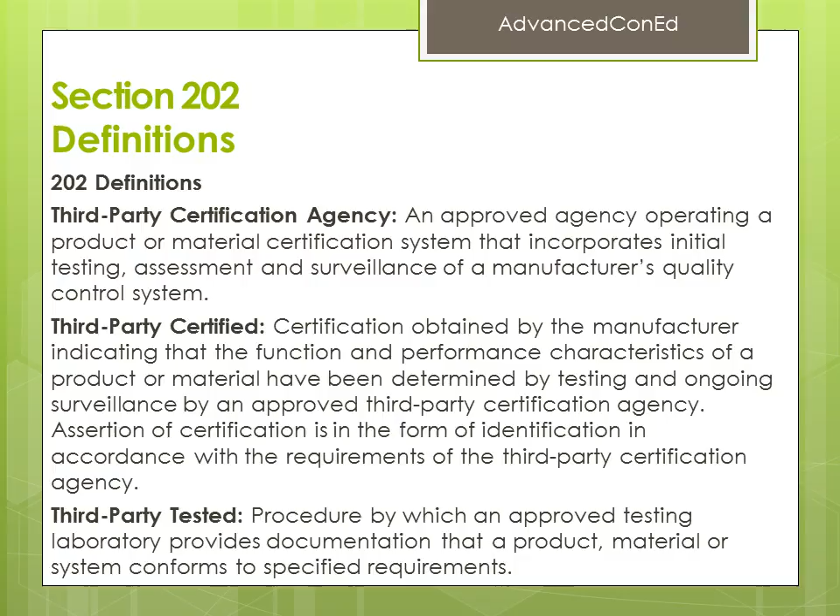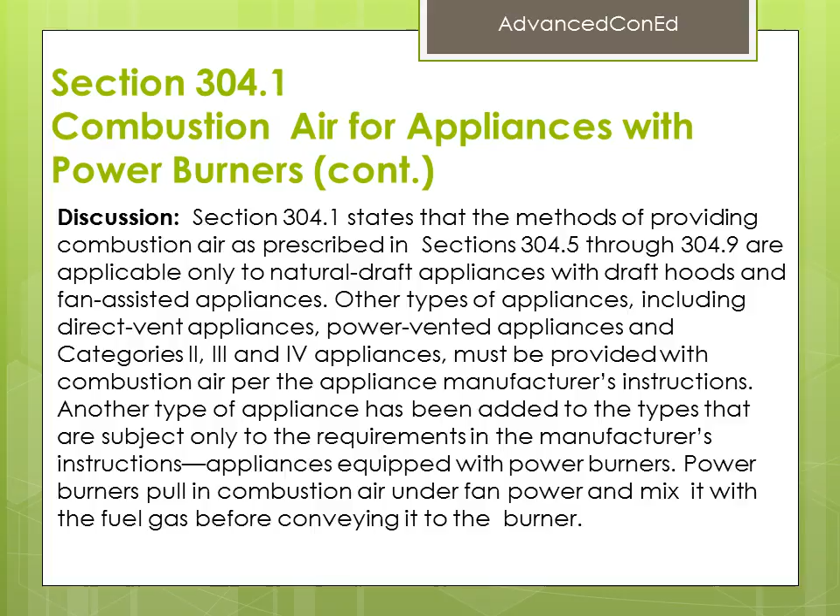Section 304.1, Combustion Air for Appliances with Power Burners, continued. Discussion continued: The methods in Section 304.5 through 304.9 were based on the physics of natural draft, fan-assisted, and Category 1 appliances, and therefore failed to account for the nature of powered systems like power burners. The manufacturer's instructions for large input power burner appliances specify the size of combustion air openings by their own methods. Typically, these methods result in much smaller openings than prescribed in the code. However, some manufacturers simply refer back to the code instead of offering their own method.

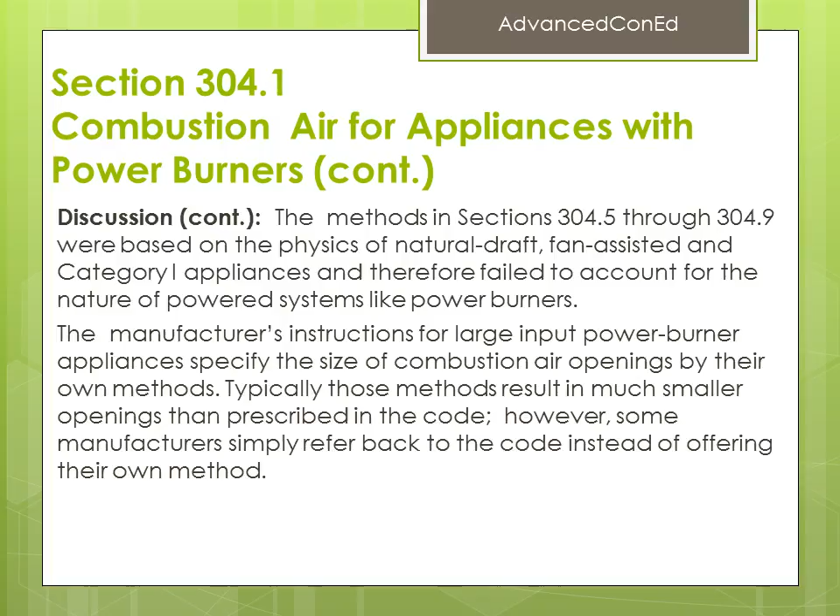Section 304.1, Combustion Air for Appliances with Power Burners, continued. Please review the following diagram at your own rate.

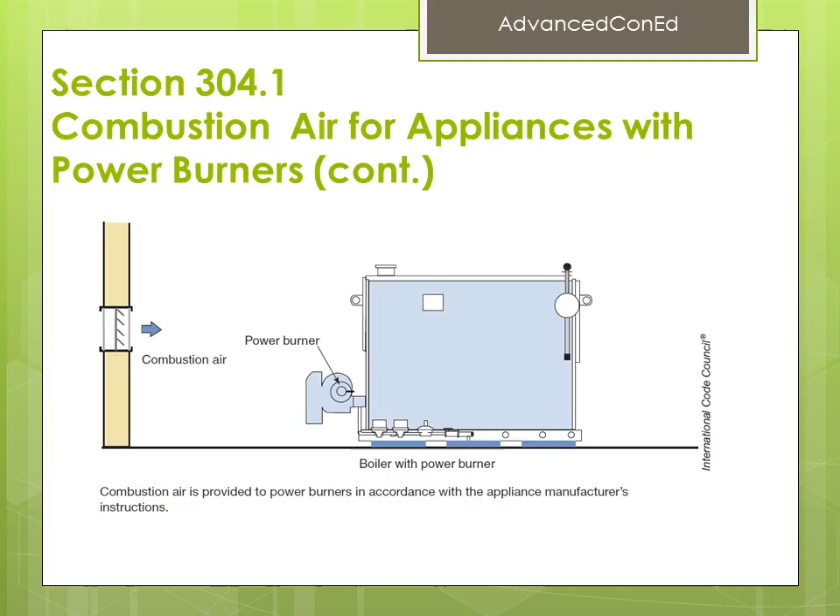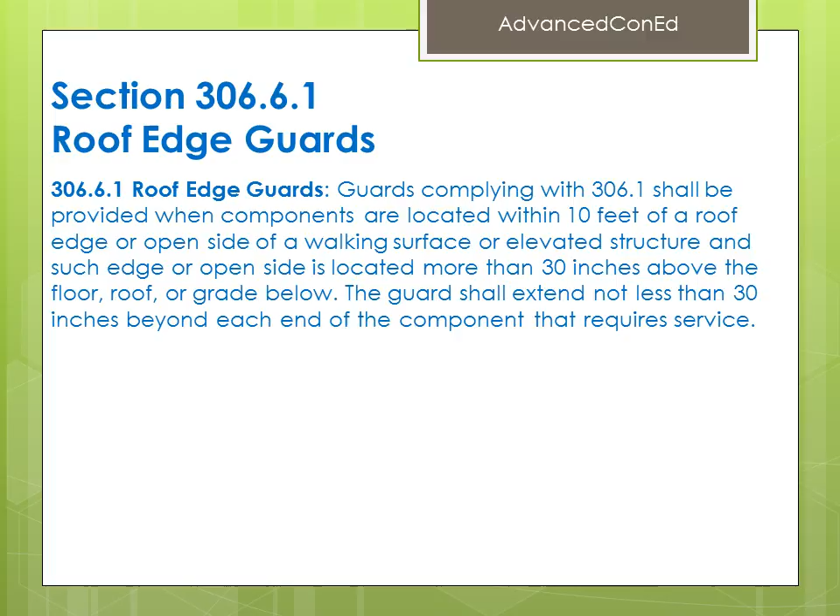Section 306.6.2 Skylight Guards. Guards complying with Section 306.6 shall be provided when a skylight is within 10 feet of the component that requires service. The guard shall extend 30 inches beyond the edge of the skylight. Exceptions: Guards are not required when the skylight is located at least 42 inches above the highest point of the walking surface adjacent to the skylight or component.

Guards are not required if some other provision for skylight fall-through protection is provided and approved by the authority having jurisdiction.

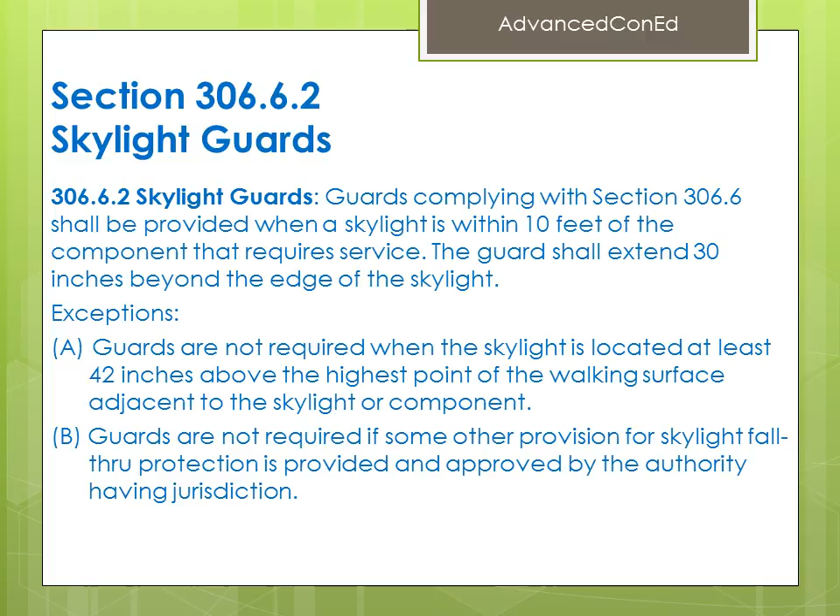Section 306.6.3 Roof Hatch Guards. Guards complying with Section 306.6 shall be provided when a roof hatch is within 10 feet of the component that requires service. The guard shall extend 30 inches beyond the edge of the roof hatch.

If the component is within 10 feet of the ladder access side of the roof hatch, the guard shall incorporate a self-closing, self-latching gate. The gate shall have a top edge of not less than 42 inches above the elevated surface adjacent to the gate and shall not allow the passage of a 21-inch sphere.

If a roof hatch exists within 10 feet of a roof edge that is located more than 30 inches above the floor, roof, or grade below, and a new component that requires service is on that existing roof or elevated structure, then a guard complying with Section 306.6 shall be added between the existing roof hatch and the roof edge.

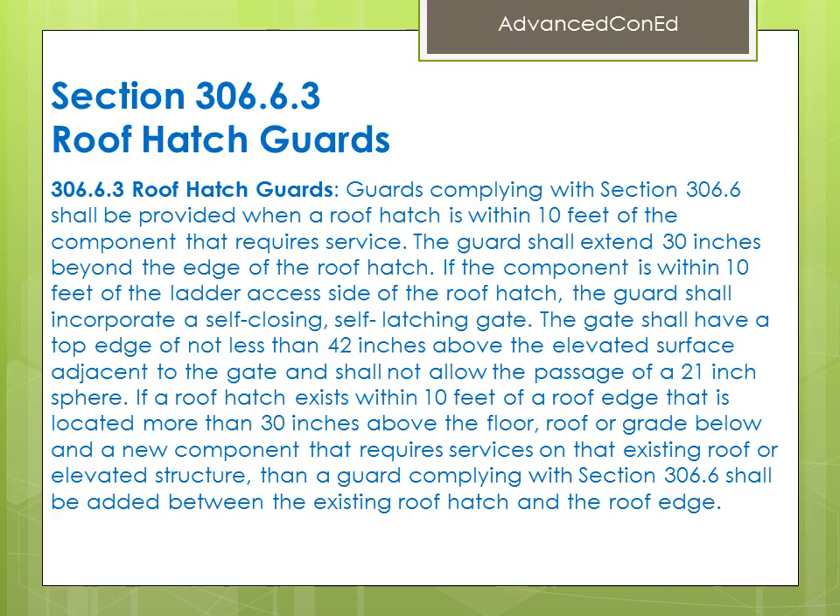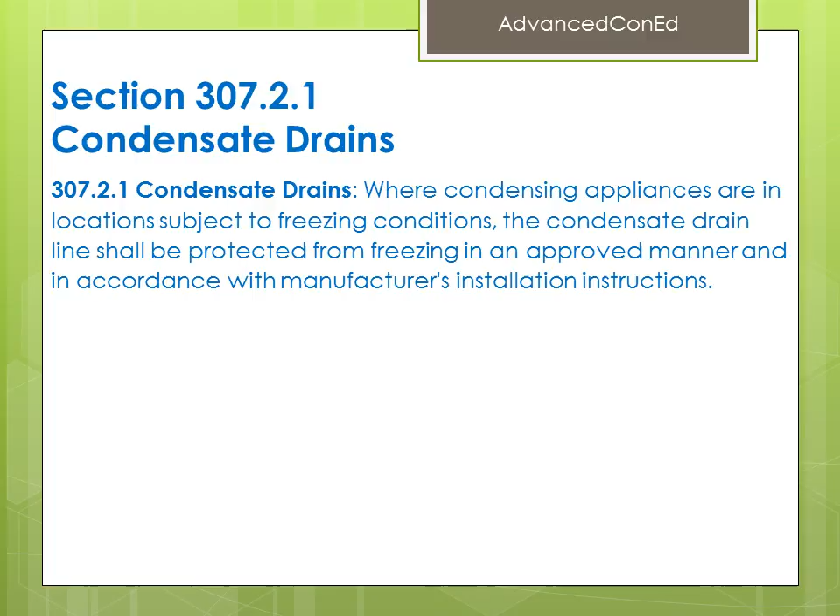Section 307.6 Condensate Pumps, continued. Discussion: Condensate pumps are often located in attics, crawl spaces, and above ceilings where they are not readily observable. If they fail, the condensate overflow can cause structural damage to the building, especially where the overflow will not be noticed immediately. The majority of such pumps are equipped with simple float controls that can be wired in series with the appliance or equipment control circuit.

When the pump system fails, the float will rise in the reservoir and open a switch before the condensate starts to overflow the reservoir. These float controls are commonly not connected, or the pump might not be equipped with an overflow switch. This new code section requires the installation of condensate pumps that have this overflow shutoff capability and requires that the appliance or equipment served be connected to take advantage of that feature.

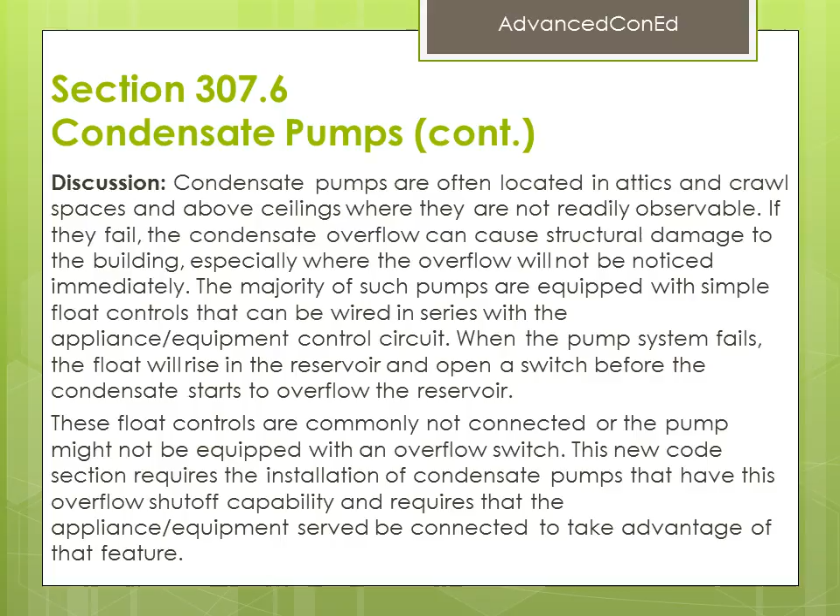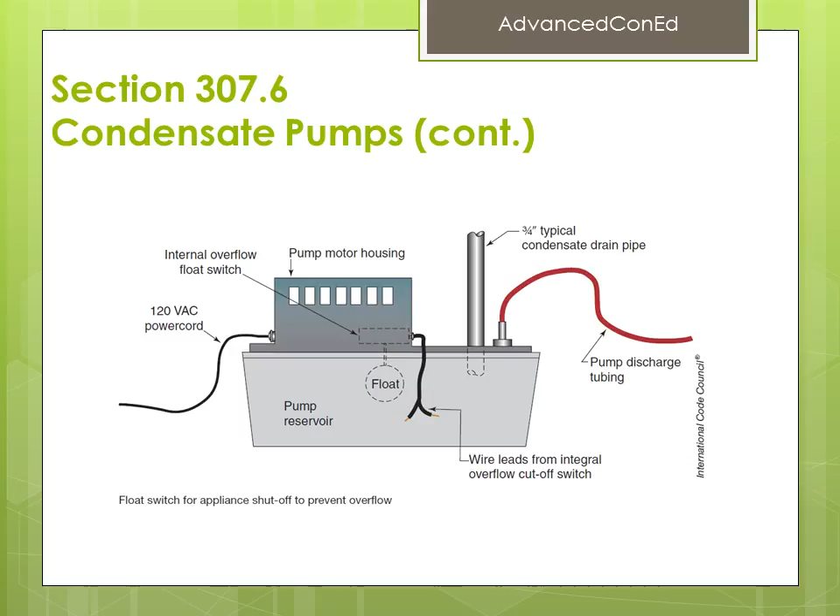Section 308.1 Clearance to Combustible Materials. Scope: This section shall govern the reduction in required clearances to combustible materials, including gypsum board and combustible assemblies, for chimneys, vents, appliances, devices, and equipment. Clearance requirements for air conditioning equipment and central heating boilers and furnaces shall comply with sections 308.3 and 308.4.

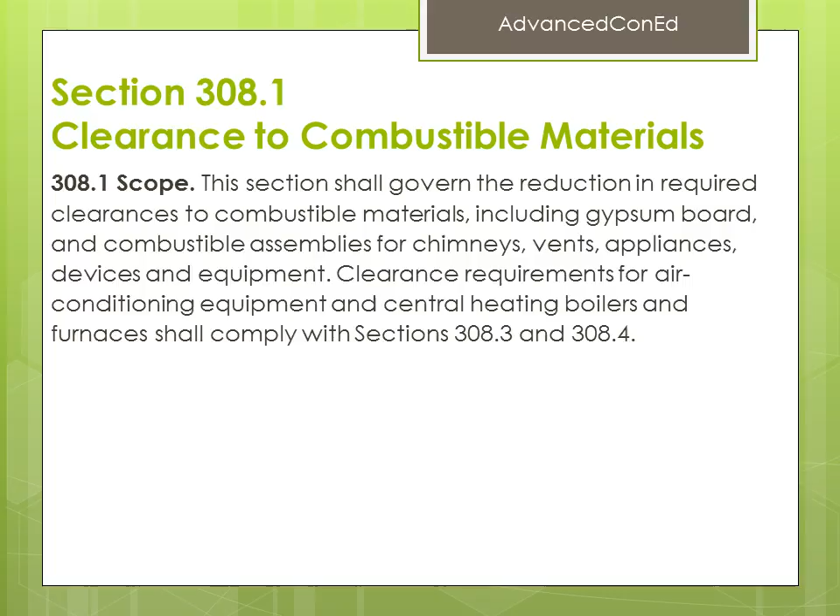Section 308.1 Clearance to Combustible Materials, continued. Discussion: Gypsum board, also known as drywall, is often incorrectly thought to be a non-combustible material. Because of this misunderstanding, the proper clearance to gypsum board required by certain appliances has not been maintained. The code now states that gypsum board is to be addressed in a manner consistent with any other combustible material.

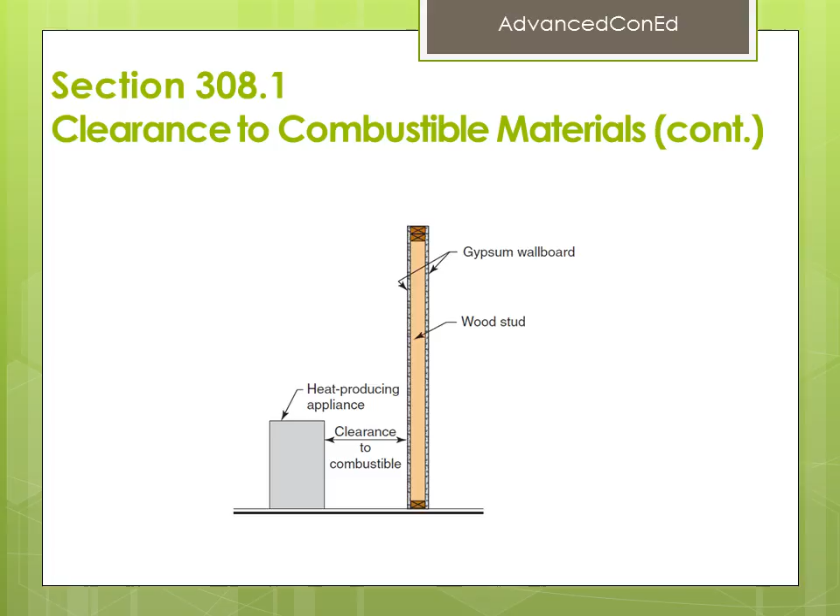Section 310.1.1 Corrugated Stainless Steel Gas Piping Systems. Corrugated stainless steel, or CSST, gas piping systems and piping systems containing one or more segments of CSST shall be bonded to the electrical service grounding electrode system or, where provided, the lightning protection grounding electrode system.

Exception: Corrugated stainless steel gas piping or tubing products or systems that have been designed, manufactured, and listed for installation without bonding to the grounding electrode system shall be permitted to be installed in accordance with the manufacturer's installation instructions.

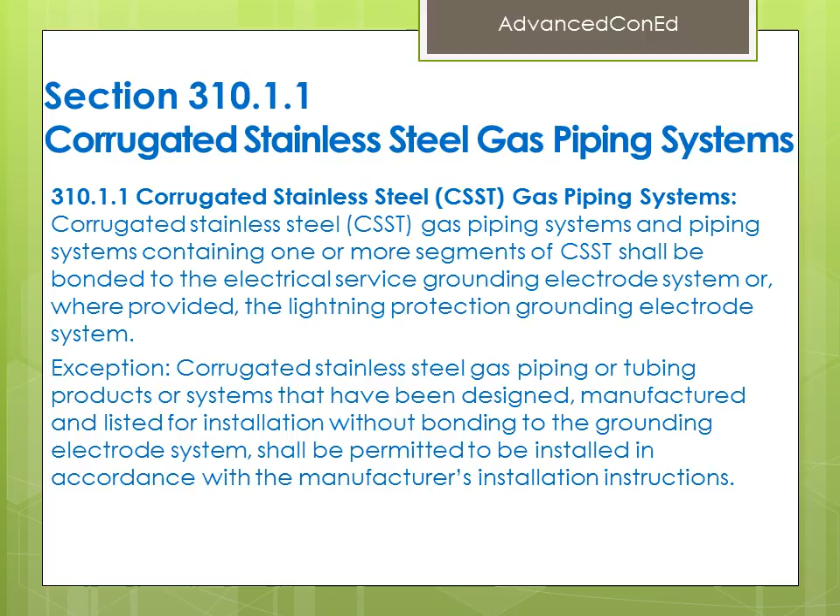Sections 310.1.1.1, 310.1.1.2, and 310.1.1.3. Electrical bonding of corrugated stainless steel tubing.

310.1.1.1 Bonding jumper length. The length of the bonding jumper between the connection to a gas piping system and the connection to a grounding electrode system shall not exceed 75 feet. Any additional grounding electrodes used shall be bonded to the electrical service grounding electrode system.

310.1.1.2 Bonding Connections. Bonding connections shall be in accordance with NFPA 70. 310.1.1.3 Connection Devices. Devices used for making the bonding connection shall be listed for the application in accordance with UL 467.

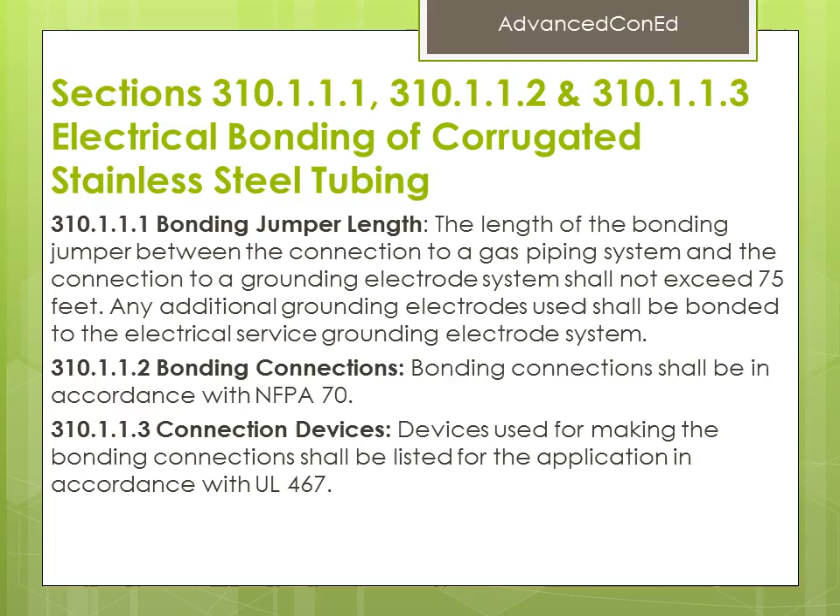Sections 310.1.1.1, 310.1.1.2, and 310.1.1.3. Electrical bonding of corrugated stainless steel tubing. Continued.

Discussion. Extensive testing was performed by the CSST industry to determine how well the bonding protects the CSST from indirect lightning strikes and lightning-induced currents. The testing concluded that the bonding jumper was functionally adequate up to approximately 100 feet in preventing arcing, thus suggesting the need for a length limit.

A length limit of 75 feet was chosen to provide a safety factor. Bonding the CSST to an independent grounding electrode is prohibited. If supplemental electrodes are installed, the code requires that they be bonded back to the electrical service grounding electrode system, consistent with NFPA 70 requirements for a common grounding electrode system.

The points of connection to the electrical service grounding electrode system, the methods of connection, and the protection of the bonding conductors must be in accordance with NFPA 70. The devices, such as clamps, that are used to connect the bonding jumper on both ends must be listed for the application and environment in which they are installed.

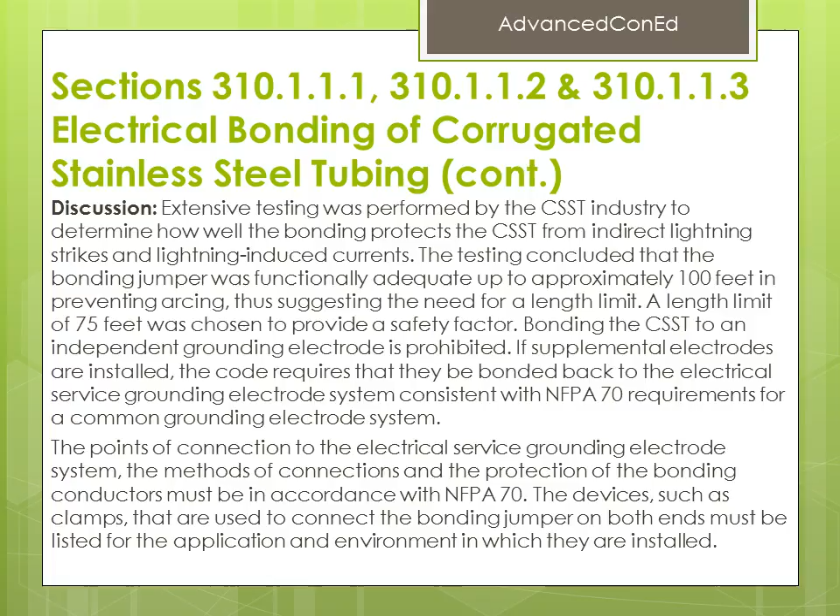Sections 310.1.1.1, 310.1.1.2, and 310.1.1.3. Electrical bonding of corrugated stainless steel tubing.

Sections 401.1, 401.9, and 401.10. Identification, testing, and certification.

401.1 Installation of materials. All materials used shall be installed in strict accordance with the standards under which the materials are accepted and approved. In the absence of such, installation instructions shall be followed. Where the requirements of reference standards or manufacturer's installation instructions do not conform to the minimum provisions of this code, the provisions of this code shall apply.

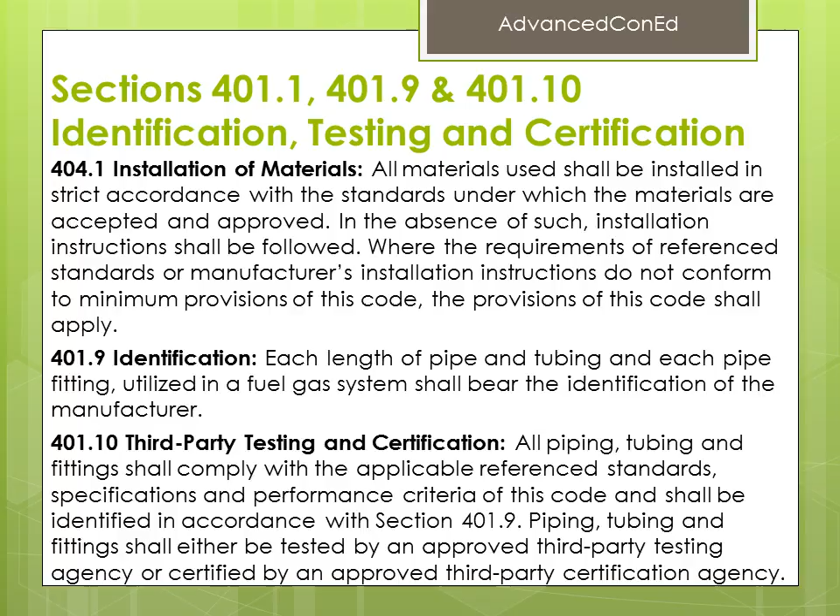Sections 401.1, 401.9, and 401.10. Identification, testing, and certification continued.

Discussion. Each section of pipe, tubing, and each fitting in a gas piping system must bear the identification of the manufacturer. This is the industry method of verifying that the pipe and fittings comply with the standards recognized in the code.

Provisions have also been added to provide guidance on third-party certification.

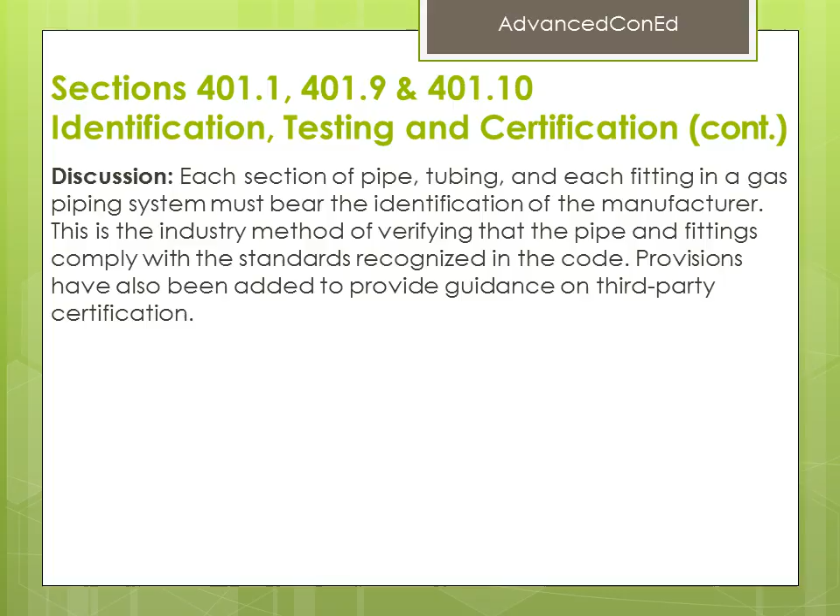Section 402.2, Maximum Gas Demand for Pipe Sizing.

The volumetric flow rate of gas to be provided shall be the sum of the maximum input of the appliances served. The total connected hourly load shall be used as the basis for pipe sizing, assuming that all appliances could be operating at full capacity simultaneously.

Where a diversity of load can be established, pipe sizing shall be permitted to be based on such loads. The volumetric flow rate of gas to be provided shall be adjusted for altitude where the installation is above 2,000 feet in elevation.

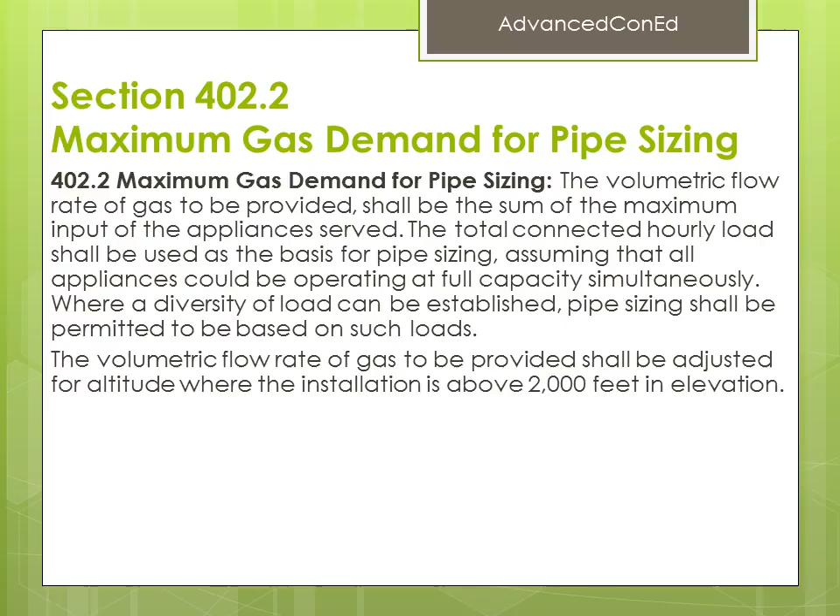Section 402.2, Maximum Gas Demand for Pipe Sizing continued. Discussion. Table 402.2 in previous editions of the code provided estimates as a placeholder in the piping system design, and the design would have to be verified after the true loads were known.

This process introduced the risk that the estimate table could be relied upon solely, and the piping system might be undersized in some cases. It was felt that such design guidance tables belonged in a handbook rather than in a code, and that such guidance tables could easily be misused.

It is safer to never introduce an estimated load in the first place. Designers could use estimated loads if they needed to, but the code should not condone the practice. Also, it is difficult for such a table to accurately represent the many different appliances in the marketplace.

Section 402.2, Maximum Gas Demand for Pipe Sizing continued. Please review the following diagram at your own rate.

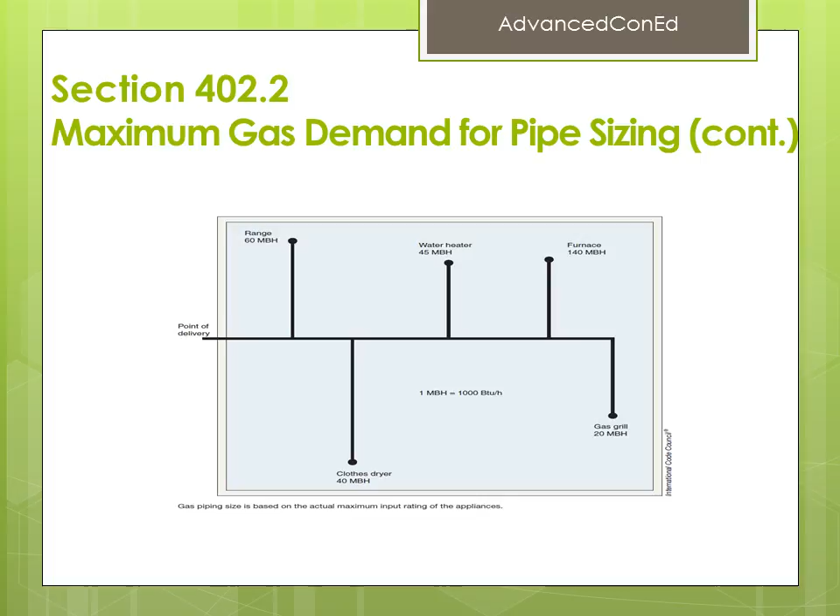Section 403.6, Plastic Pipe, Tubing, and Fittings.

Polyethylene plastic pipe, tubing, and fittings used to supply fuel gas shall conform to ASTM D2513. Such pipe shall be marked gas and ASTM D2513. Plastic pipe, tubing, and fittings other than polyethylene shall be identified and conform to the 2008 edition of ASTM D2513. Such pipe shall be marked gas and ASTM D2513.

Polyvinyl chloride, PVC, and chlorinated polyvinyl chloride, CPVC, plastic pipe, tubing, and fittings shall not be used to supply fuel gas.

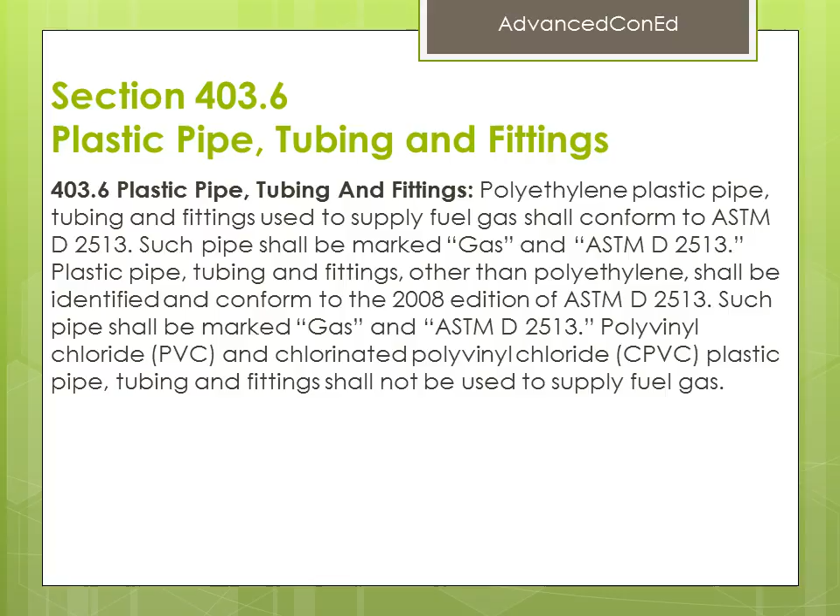Section 403.6, Plastic Pipe, Tubing, and Fittings, continued.

Discussion. The code now references the 2013 edition of ASTM D2513, which has been revised to address polyethylene plastic pipe, tubing, and fittings only, whereas the 2008 edition addressed all plastic materials. The code had to maintain a reference to the 2008 edition of the standard in order to address plastic other than PE, such as polyamide.

It was determined that polyamide pipe is currently used to supply fuel gas. However, CPVC and PVC are not. Further, it was decided that because of the brittle nature of PVC and CPVC, especially at low temperatures, these materials are not suitable for conveying fuel gas. Rather than being silent, the code now prohibits what the marketplace has failed to embrace as a viable material for fuel gas.

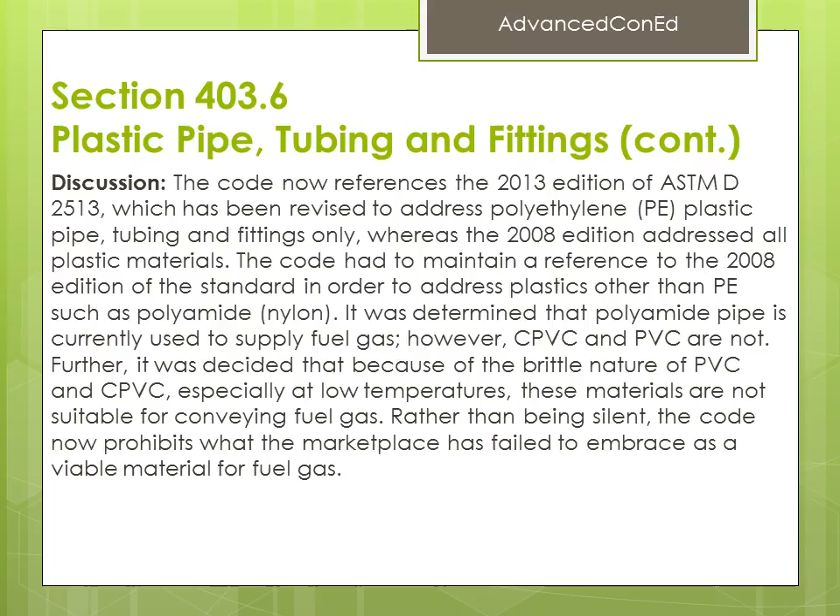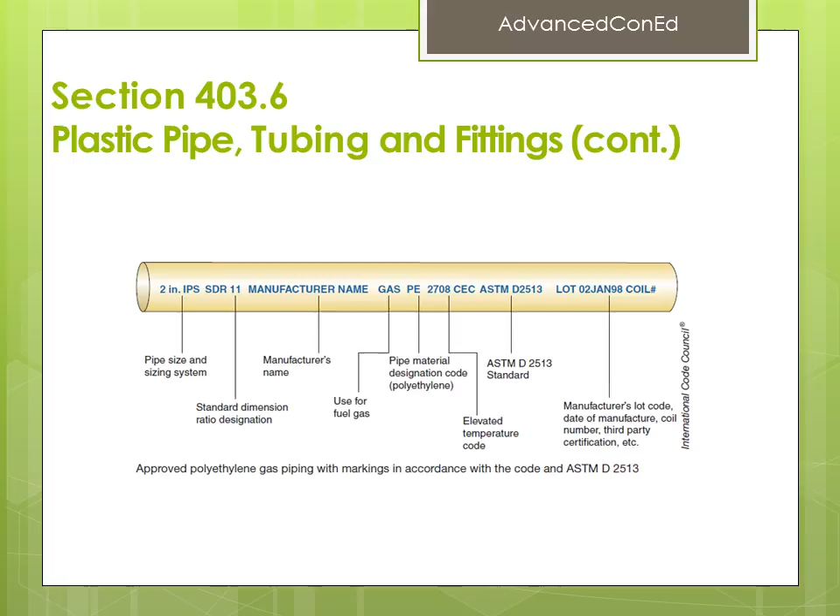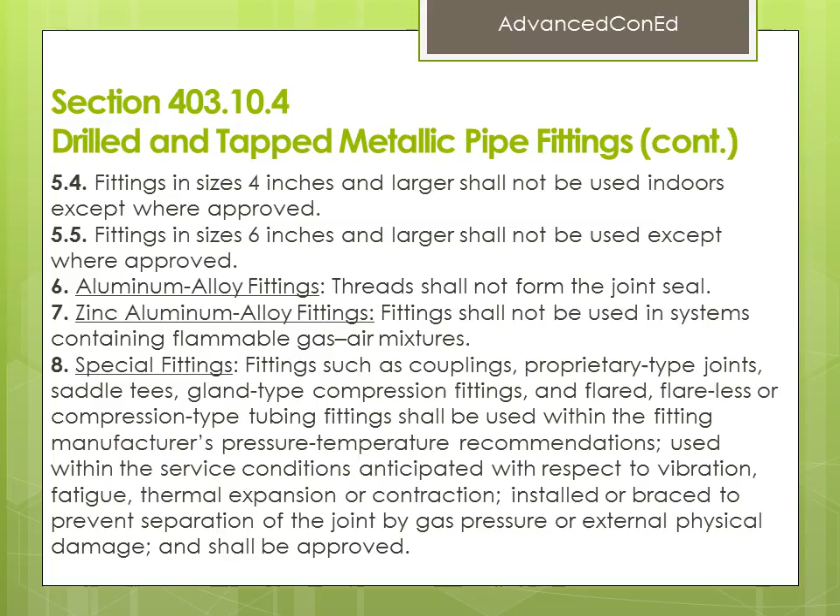Section 403.10.4 Drilled and tapped metallic pipe fittings, continued.

Discussion. Occasionally, an installer will drill a hole in a Schedule 40 or heavier pipe fitting and tap threads in the hole for the purpose of making a test connection or branch connection. The pipe fittings were never designed to be drilled and tapped. The resulting pipe connection or plugged opening would not have sufficient threads to make a tight joint that is both strong and free of leakage, and rely solely on the thread sealant paste or tape to effect a seal.

Field drilling and tapping of outdoor fittings on the outlet side of a meter is performed by some gas utilities. The 5 conditions in the new text limit field drilling and tapping of outdoor fittings to gas utility personnel and authorized contractors. The practice is limited to outdoor fittings, and the entire operation must be performed with specialized tools and equipment in accordance with the prescribed procedures. The drilling and tapping of pipe fittings is prohibited in all cases except where performed in accordance with all 5 conditions that are intended to mitigate the risk.

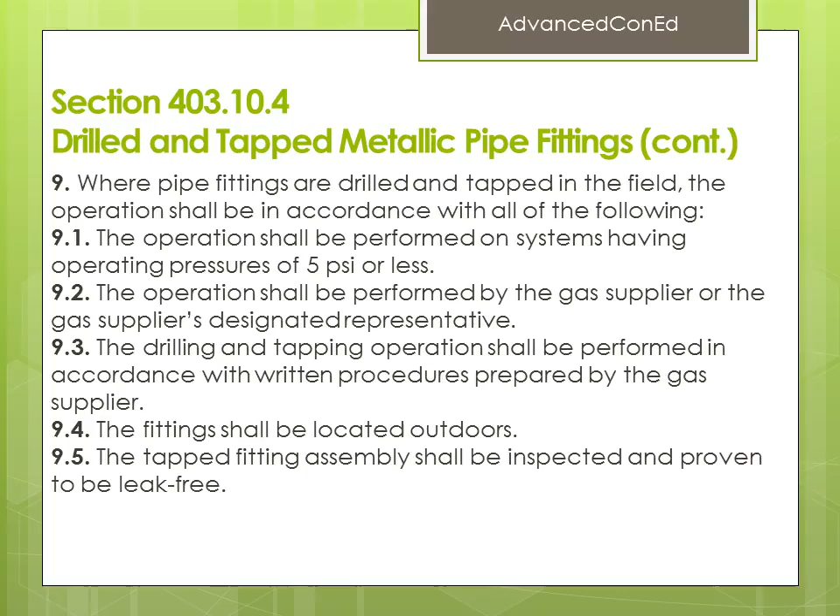Section 403.10.4 Drilled and tapped metallic pipe fittings, continued. Discussion. Occasionally, an installer will drill a hole in a Schedule 40 or heavier pipe fitting and tap threads in the hole for the purpose of making a test connection or branch connection. The pipe fittings were never designed to be drilled and tapped. The resulting pipe connection or plugged opening would not have sufficient threads to make a tight joint that is both strong and free of leakage, and rely solely on the thread sealant paste or tape to effect a seal.

Field drilling and tapping of outdoor fittings on the outlet side of a meter is performed by some gas utilities. The 5 conditions in the new text limit field drilling and tapping of outdoor fittings to gas utility personnel and authorized contractors. The practice is limited to outdoor fittings, and the entire operation must be performed with specialized tools and equipment in accordance with the prescribed procedures. The drilling and tapping of pipe fittings is prohibited in all cases except where performed in accordance with all 5 conditions that are intended to mitigate the risk.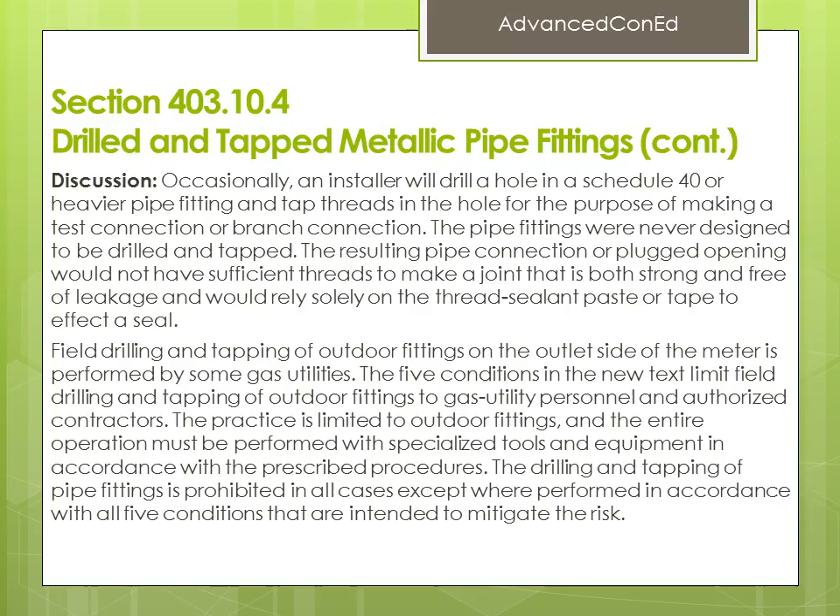Section 404.2 CSST Piping Systems. 404.2 CSST. CSST piping systems shall be installed in accordance with the terms of their approval, the conditions of listing, the manufacturer's installation instructions, and this code.

Discussion. CSST gas piping systems are listed to an ANSI standard and, like other equipment and appliances, are now required to be installed in accordance with the terms of their approval, the conditions of the listing, and the manufacturer's installation instructions.

Section 404.2 CSST Piping Systems, continued. Please review the following diagram at your own rate.

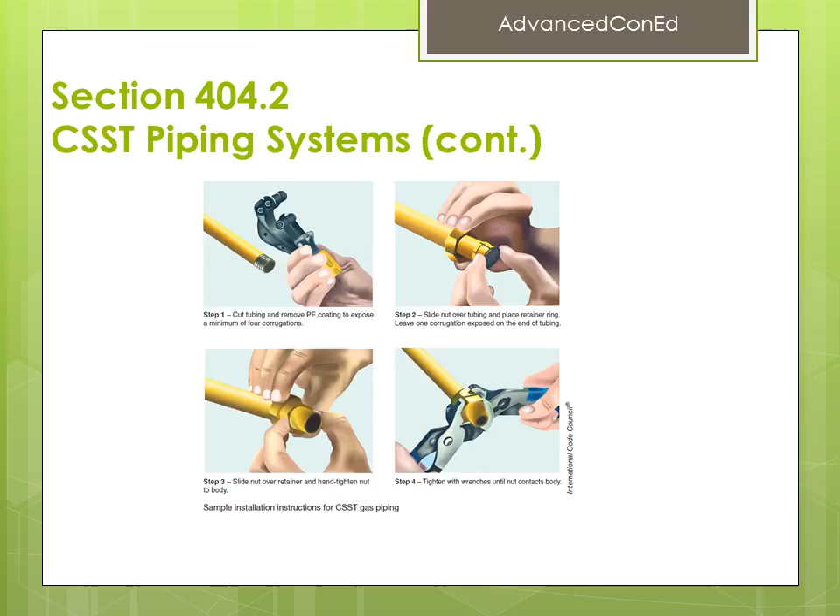Section 404.5, Fittings in Concealed Locations.

Fittings installed in concealed locations shall be limited to the following types: 1. Threaded elbows, tees, and couplings. 2. Brazed fittings. 3. Welded fittings. 4. Fittings listed to American National Standards Institute LC1/CSA 6.26 or American National Standards Institute LC4.

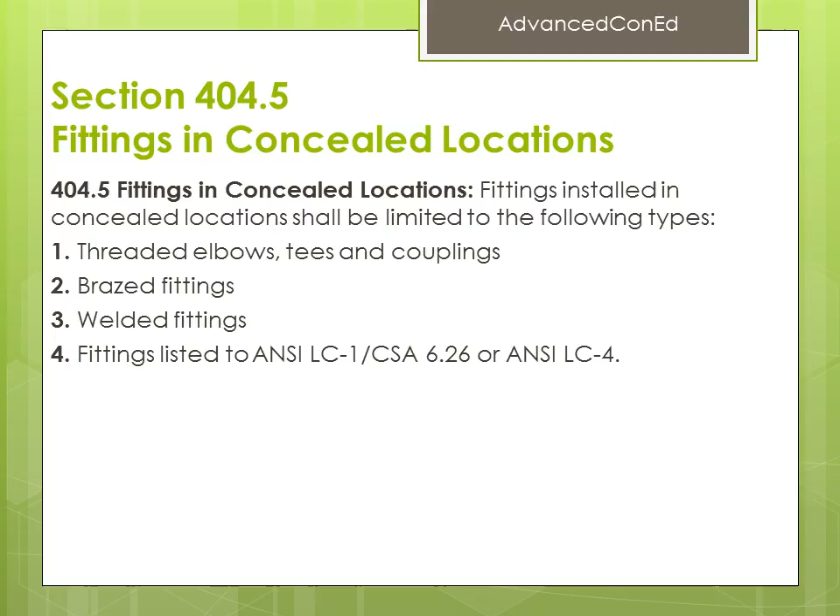Section 404.5 Fittings in Concealed Locations, continued. Discussion. Rather than listing what is prohibited and having exceptions, the text has been reformatted to state what is allowed in concealed locations. The new text lists 4 types of allowed fittings: threaded elbows, tees, and couplings; brazed fittings; welded fittings; and proprietary fittings listed to ANSI LC1 or LC4.

By omission, all other types of fittings are prohibited in concealed locations. In previous editions of the code, this section has caused interpretation difficulties, and the new text simply clarifies what has always been the intent. In future editions of the code, Item 1 will likely be revised to add threaded plugs and caps, as this was revised in ANSI standards.

When the code refers to couplings, these fittings are tapered thread couplings, not straight thread couplings that are commonly found. See Section 403.9.

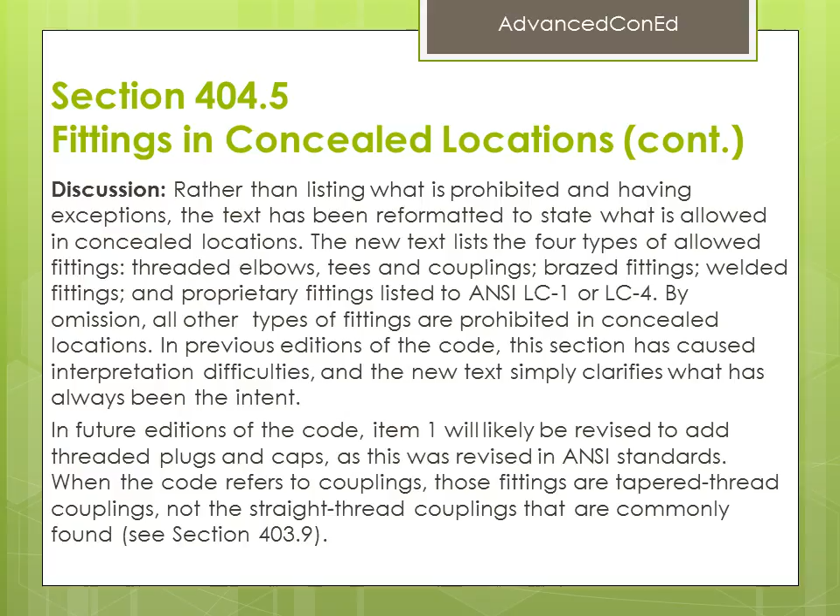Section 404.5 Fittings in Concealed Locations, continued. Please review the following diagram at your own rate.

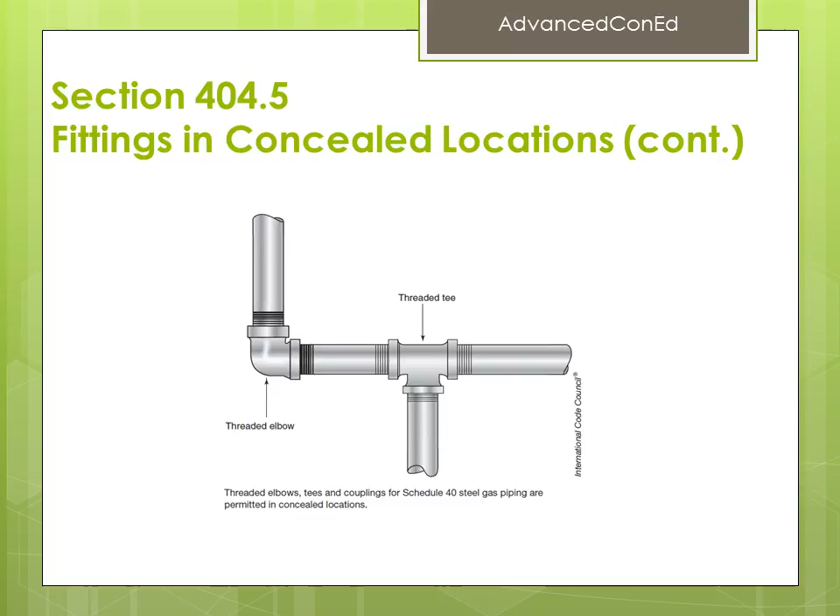Section 404.7 Protection of Concealed Piping Against Physical Damage. 404.7 Protection Against Physical Damage. Where piping will be concealed within light frame construction assemblies, the piping shall be protected against penetration by fasteners in accordance with Section 404.7.1 through 404.7.3. Exception: black steel piping and galvanized steel piping shall not be required to be protected.

Section 404.7 Protection of Concealed Piping Against Physical Damage, continued. 404.7.1 Piping through bored holes or notches. Where piping is installed through holes or notches in framing members, and the piping is located less than 1.5 inches from the framing member face to which wall, ceiling, or floor membranes will be attached, the piping shall be protected by shield plates that cover the width of the pipe and framing member and that extend not less than 4 inches to each side of the framing member.

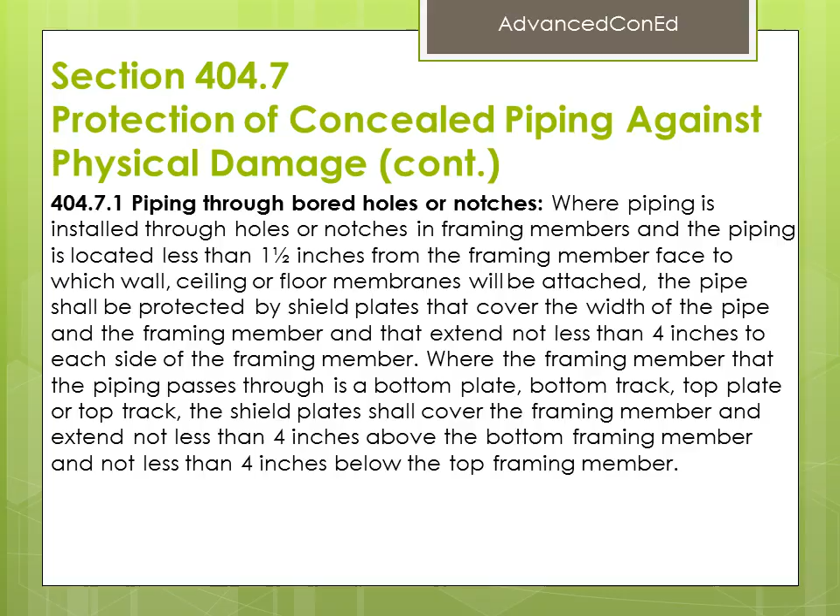Section 404.7 Protection of Concealed Piping Against Physical Damage, continued. 404.7.2 Piping installed in other locations. Where the piping is located within a framing member and is less than 1.5 inches from the framing member's face to which wall, ceiling, or floor membranes will be attached, the piping shall be protected by shield plates that cover the width and length of the piping.

Where the piping is located outside a framing member and is located less than 1.5 inches from the nearest edge of the face of the framing member to which the membranes will be attached, the piping shall be protected by shield plates that cover the width and length of the piping. 404.7.3 Shield plates. Shield plates shall be of steel material having a thickness of not less than 0.0575 inch, number 16 gauge.

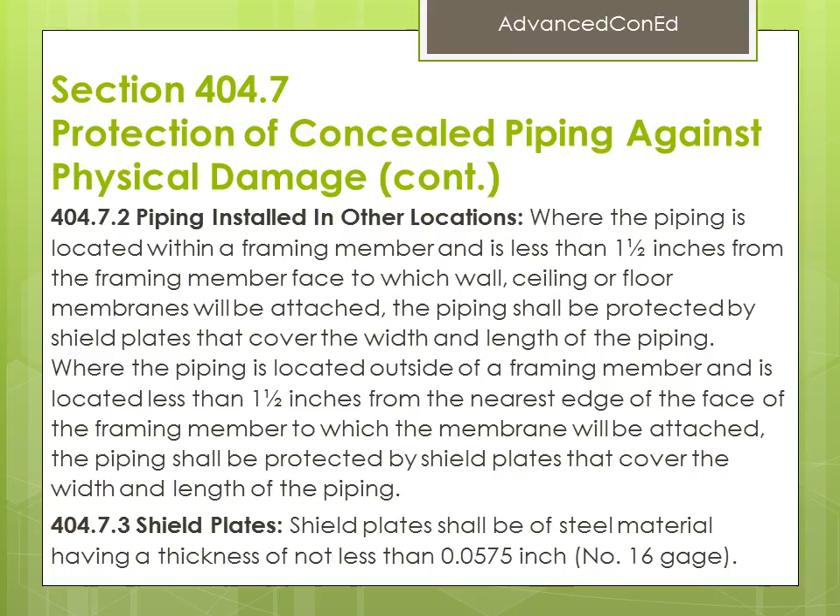Section 404.7 Protection of concealed piping against physical damage, continued. Discussion. Piping and tubing other than Schedule 40 steel pipe must be protected from penetration by nails and screws where the pipe or tubing is less than 1.5 inches from the face of the member where membranes will be attached. This protection is necessary whether the pipe or tube is perpendicular or parallel to the framing member.

Extending the protection shield 4 inches beyond the edges of the framing member is intended to protect against fasteners that miss the member or that exit the member on an angle. To avoid having protection plates run parallel with a member, the installer could simply place the pipe or tube on standoffs such that the pipe or tube is not less than 1.5 inches from the nearest edge of the face of member. Careful installation and routing of gas piping or tubing can avoid the need for installation of protection plates by simply relying on a distance of at least 1.5 inches between the pipe or tube and the fastener face of the member.

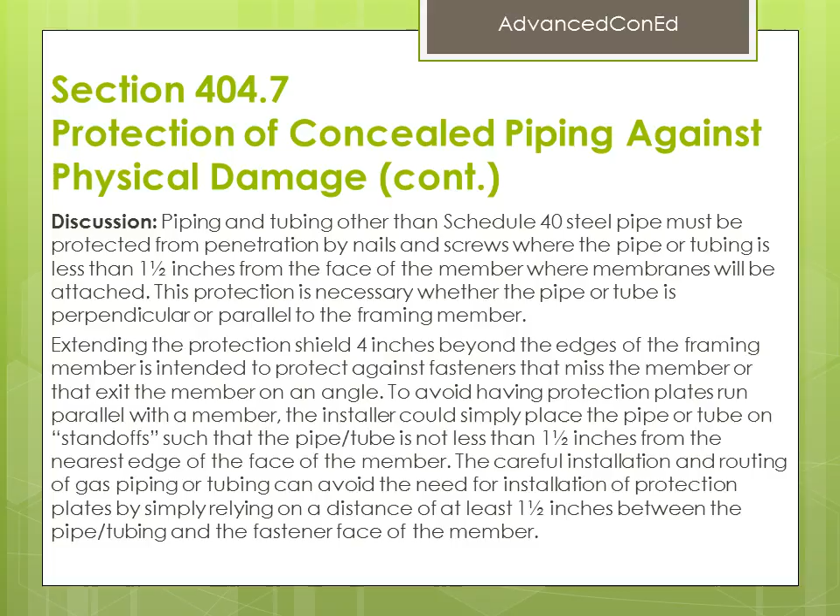Section 404.12 Minimum Burial Depth. Underground piping systems shall be installed at a minimum depth of 18 inches below grade, except as provided for in Section 404.10.1. Exception: where a minimum depth of cover cannot be provided, the pipe shall be installed in conduit or bridged, shielded.

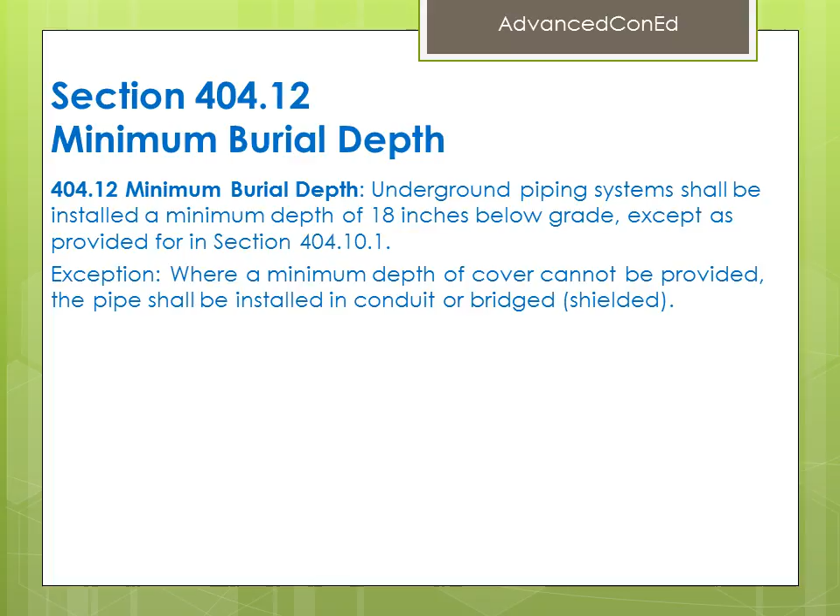Section 404.18 Pipe Cleaning. 404.18 Pipe Cleaning. The use of a flammable or combustible gas to clean or remove debris from a piping system shall be prohibited.

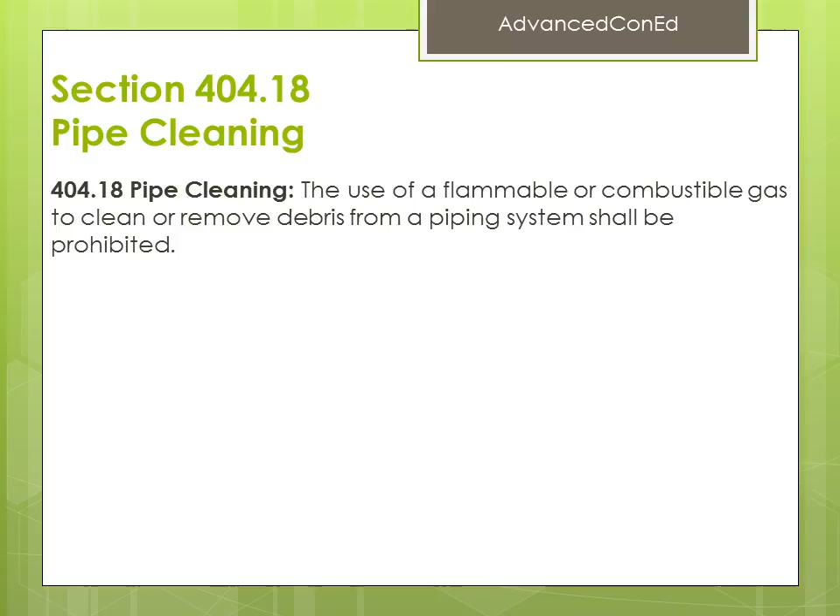Section 404.18 Pipe Cleaning, continued.

Discussion: Recent accidents resulting in explosions, injuries, and property damage have been attributed to a procedure where new gas piping systems have been flushed with high-pressure fuel gas for the purpose of pushing contaminants, debris, welding slag, and tools from the piping. Even under very well supervised conditions, this procedure has significant risks.

Alternatives include using non-flammable gases and/or mechanical devices, or PIGs, that are pulled through the piping, creating a sweeping effect. It was determined that using flammable gases for this purpose is inherently unsafe and therefore should be prohibited. Section 406.7 has been rewritten to mitigate the related hazards associated with the purging of gases from fuel gas piping.

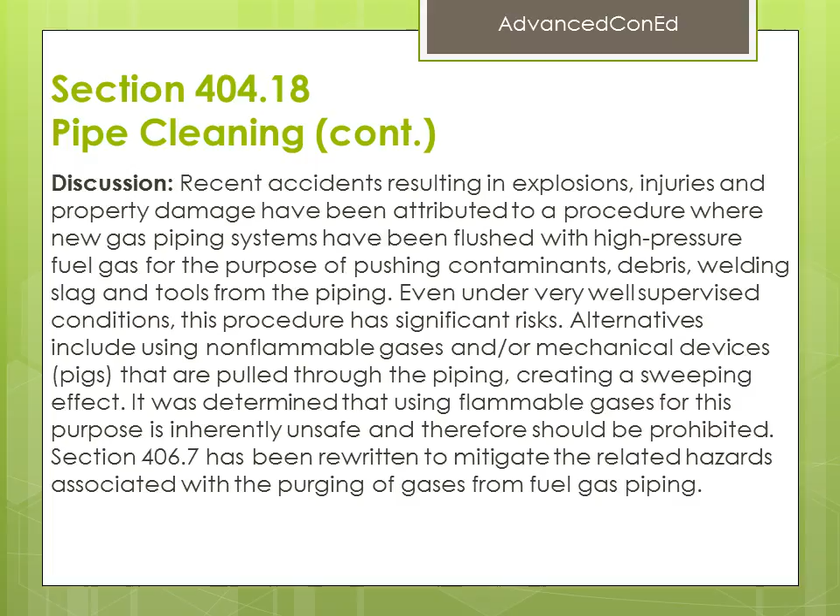Section 404.18 Prohibited Devices. A device shall not be placed inside the piping or fittings that will reduce the cross-sectional area or otherwise obstruct the free flow of gas.

Exceptions: 1. Approved gas filters. 2. An approved fitting or device where the gas piping system has been sized to accommodate the pressure drop of the fitting or device.

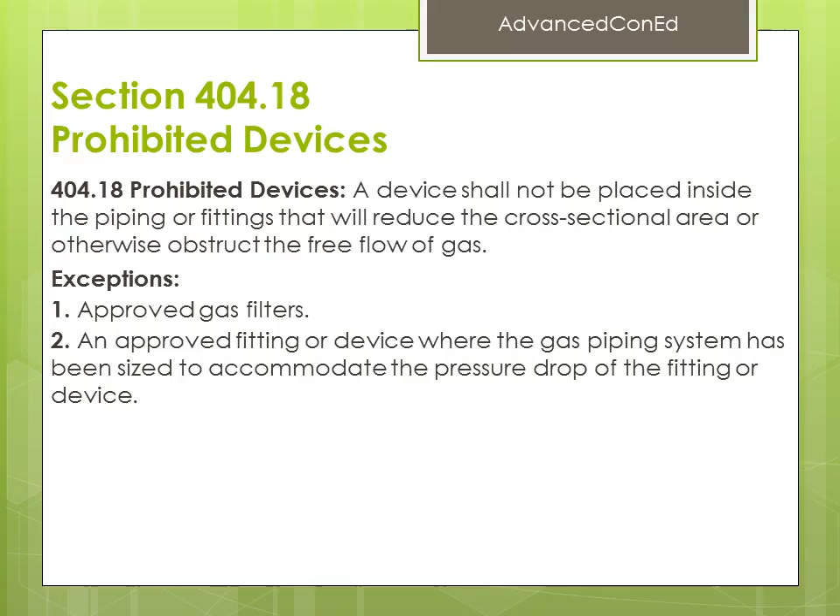Section 404.18 Prohibited Devices continued. Discussion: Devices such as excess flow valves and earthquake valves are considered restrictions in gas piping systems and generally are prohibited from being installed in gas piping and fittings.

It has now been clarified that if the gas piping system has been sized to accommodate a fitting or device placed in the gas piping system, the fitting or device is allowed to be installed.

Section 408.4 Sediment Traps. Where a sediment trap is not incorporated as part of the appliance, a sediment trap shall be installed downstream of the appliance shutoff valve as close to the inlet of the appliance as practical.

The sediment trap shall be either a T-fitting having a capped nipple of any length installed vertically in the bottommost opening of the T as illustrated in figure 408.4, or other device approved as an effective sediment trap.

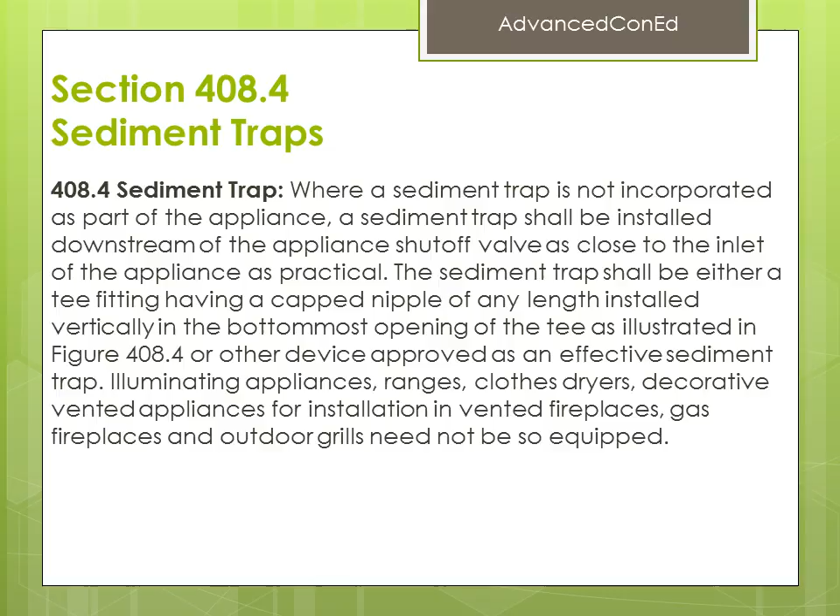Section 408.4 Sediment Traps continued. Discussion: Because of misunderstandings as to how a sediment trap is to be constructed, an illustration has been added to the code text to clarify the intended installation method.

In addition, decorative vented gas appliances and gas fireplaces are no longer required to be installed with a sediment trap. Although these appliances are susceptible to harm from debris, they are also manually operated. Therefore, the user would be in attendance and aware of any problems.

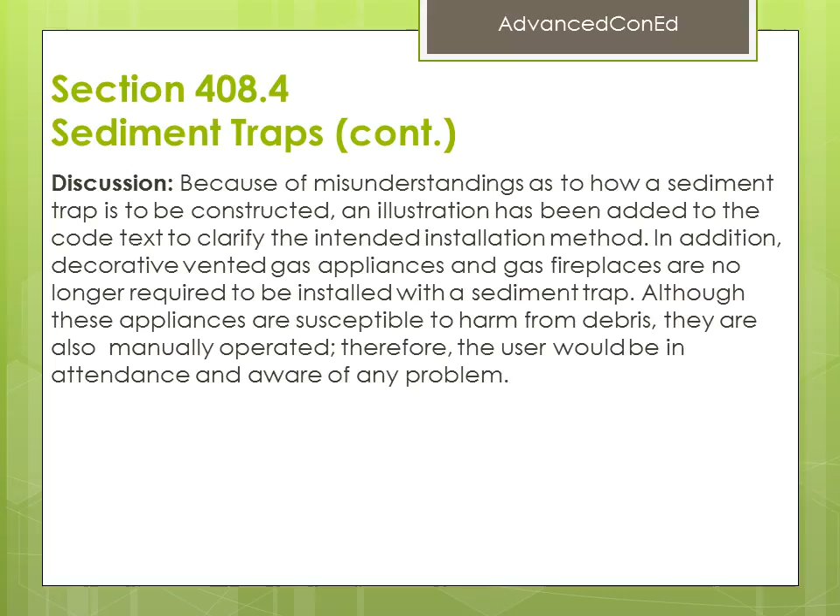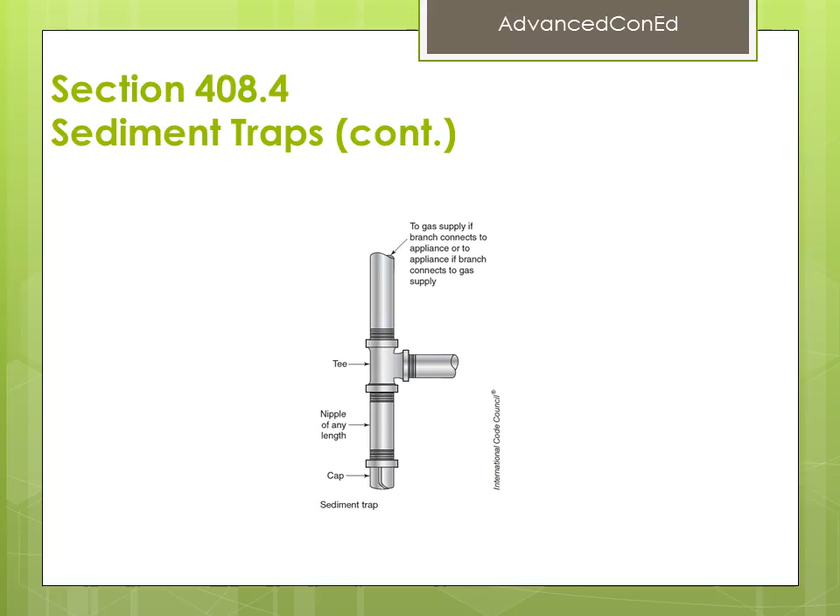Section 410.2 Medium Pressure Regulators. MP pressure regulators shall comply with the following.

1. The MP regulator shall be approved and shall be suitable for the inlet and outlet gas pressures for the application. 2. The MP regulator shall maintain a reduced outlet pressure under lockup or no-flow conditions.

3. The capacity of the MP regulator, determined by published ratings of its manufacturer, shall be adequate to supply the appliances served. 4. The MP pressure regulator shall be provided with access.

Where located indoors, the regulator shall be vented to the outdoors or shall be equipped with a leak limiting device. In either case, complying with section 410.3.

Section 410.2 Medium Pressure Regulators continued. 5. A T-fitting with one opening capped or plugged shall be installed between the MP regulator and its upstream shutoff valve. Such T-fitting shall be positioned to allow connection of a pressure measuring instrument and to serve as a sediment trap.

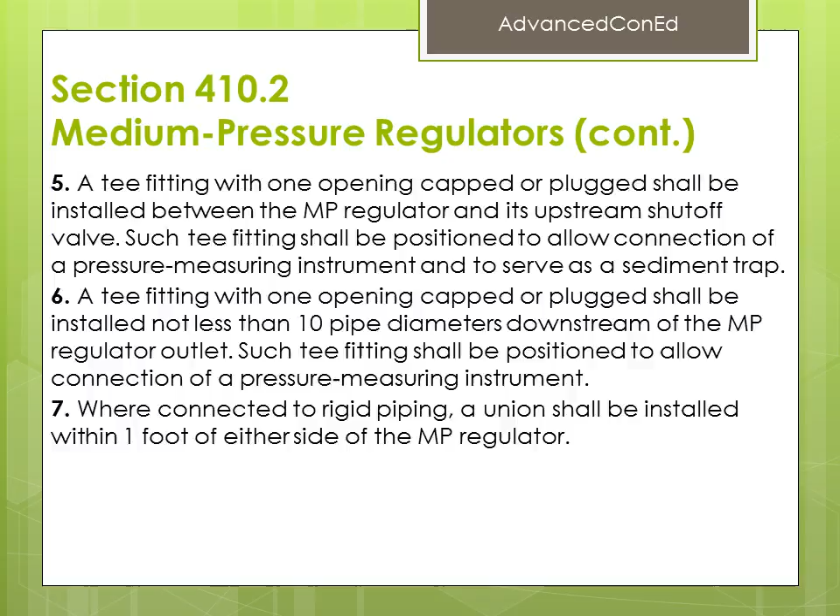Section 410.2 Medium Pressure Regulators continued. Discussion: MP regulators are line pressure regulators that serve to reduce pressures that are above 0.5 psi and less than or equal to 5 psi to some lower pressure.

They are typically installed in 2 psi and 5 psi gas distribution systems that serve appliances having a maximum input pressure of 0.5 psi. If such regulators are installed with steel piping on the inlet and outlet side, the regulators cannot be removed or isolated without disassembly of the piping system for some distance or cutting the piping.

To facilitate the removal or isolation of the regulator, a union fitting must be placed near the inlet or outlet side of the regulator. This is simply a common sense provision.

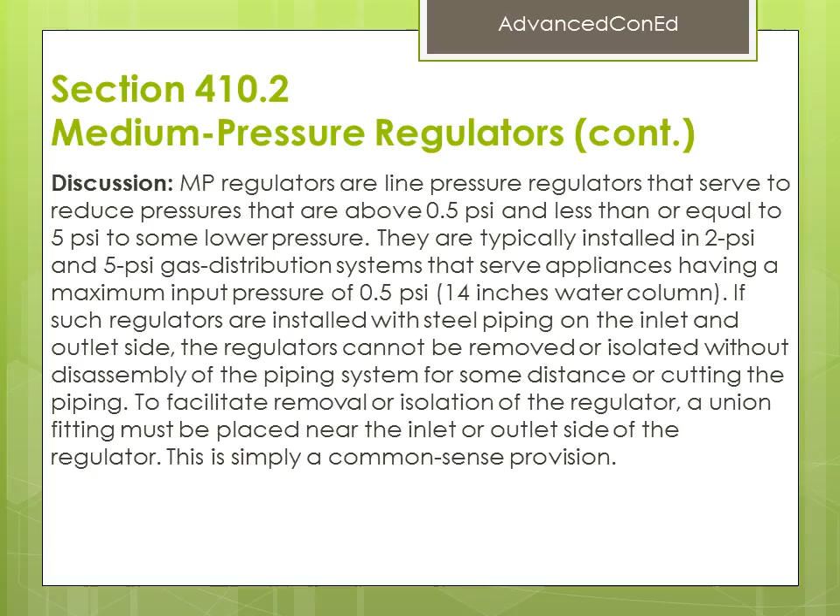Section 410.2 Medium Pressure Regulators continued. Please review the following diagram at your own rate.

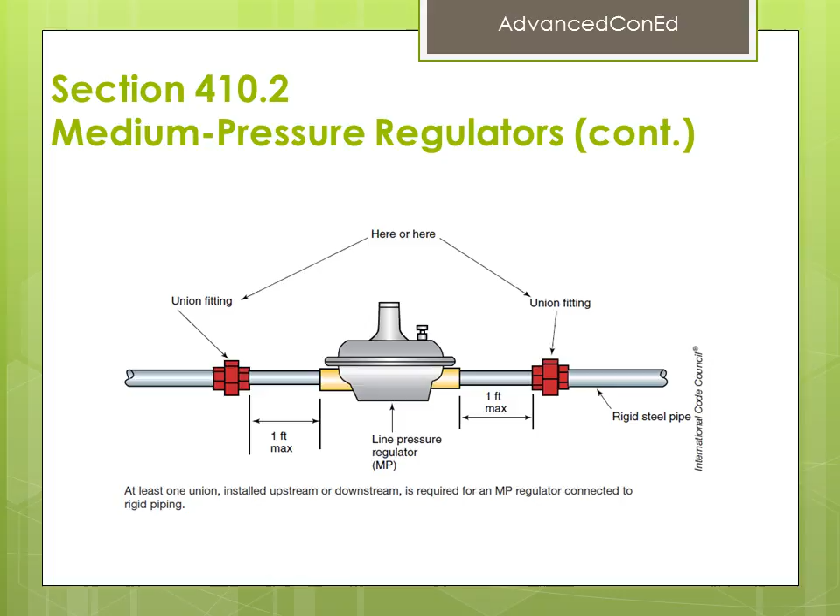Section 410.4 Excess Flow Valves. Where automatic excess flow valves are installed, they shall be listed for the application and shall be sized and installed in accordance with the manufacturer's instructions.

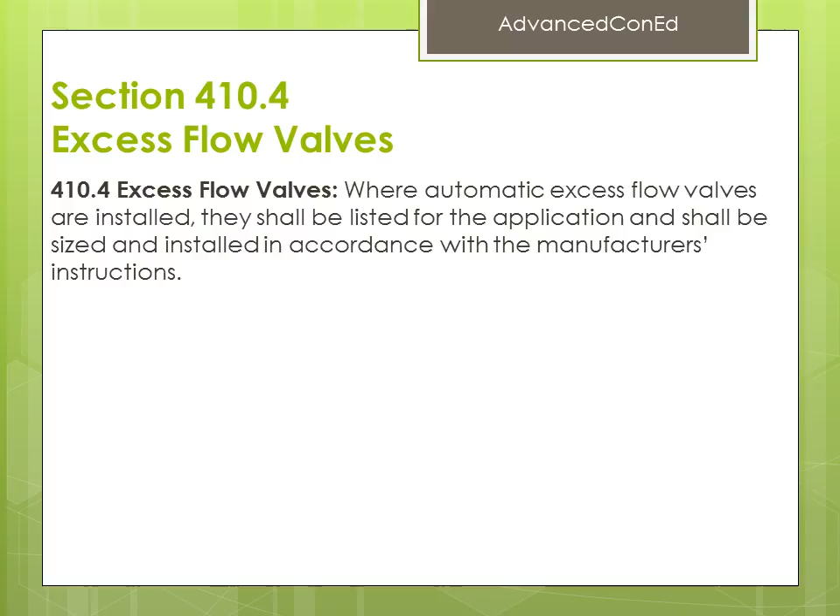Section 410.4 Excess Flow Valves continued. Discussion: Excess flow valves are now required to be listed. In order not to cause pressure drops in the gas piping system, the excess flow valve must also be sized and installed in accordance with the manufacturer's instructions.

Section 410.4 Excess Flow Valves. Please review the following diagram at your own rate.

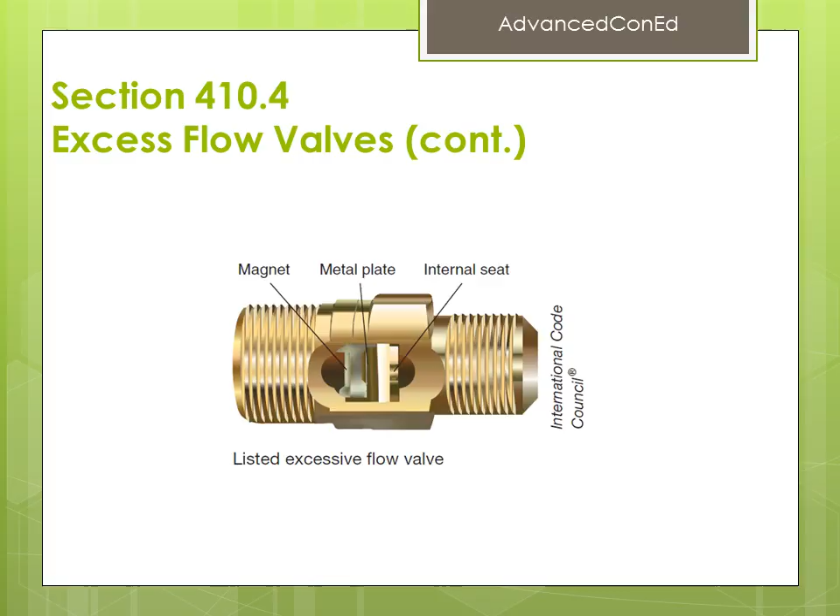Section 202 and 410.5, Flashback Arrestor Check Valve. Definitions: Flashback Arrestor Check Valve, a device that will prevent the backflow of one gas into the supply system of another gas and prevent passage of flame into the gas supply system.

410.5 Flashback Arrestor Check Valve. Where fuel gas is used with oxygen in any hot work operation, a listed protective device that serves as a combination flashback arrestor and backflow check valve shall be installed at an approved location on both the fuel gas and oxygen supply lines.

Where the pressure of the piped fuel gas supply is insufficient to ensure such safe operation, approved equipment shall be installed between the gas meter and the appliance that increases pressure to the level required for such safe operation.

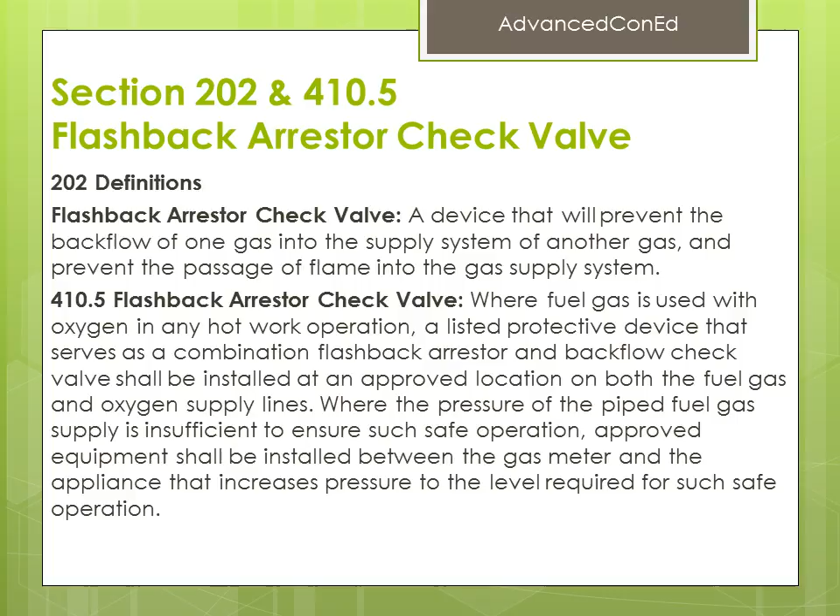Section 202 and 410.5 Flashback Arrestor Check Valve continued. Discussion: To prevent flashbacks from occurring and prevent oxygen from getting into the fuel gas supply system, fuel gas systems that are used with oxygen are now required to have a flashback arrestor and backflow check valve on the gas supply line and the oxygen supply line.

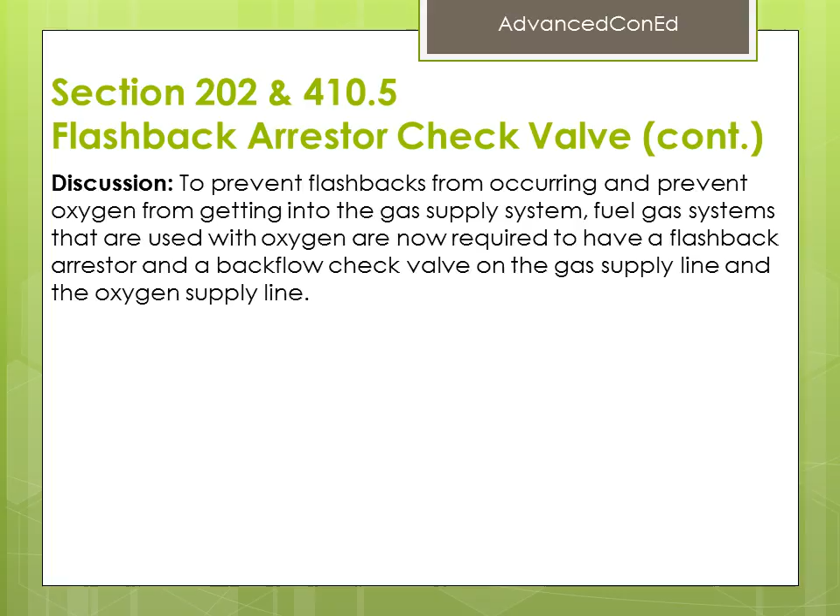Section 202 and 410.5 Flashback Arrestor Check Valve continued. Please review the following diagrams at your own rate.

Section 411.1 Connecting Portable Outdoor Appliances. Except as required by Section 411.1.1, appliances shall be connected to the piping system by one of the following: 1. Rigid metallic pipe and fittings.

2. Corrugated stainless steel tubing, where installed in accordance with the manufacturer's instructions. 3. Semi-rigid metallic tubing and metallic fittings. Length shall not exceed 6 feet and shall be located entirely in the same room as the appliance. Semi-rigid metallic tubing shall not enter a motor-operated appliance through an unprotected knockout opening.

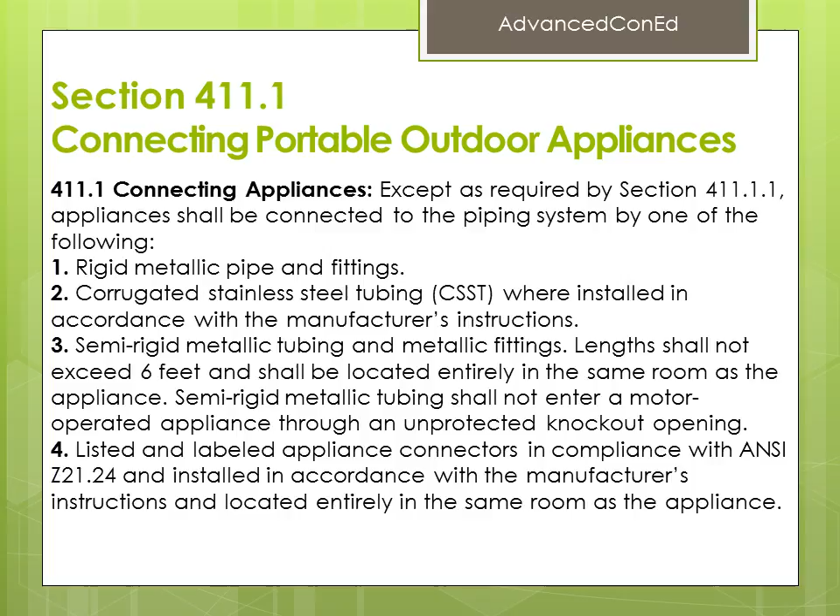Section 411.1 Connecting Portable Outdoor Appliances continued. 5. Listed and labeled quick disconnect devices used in conjunction with listed and labeled appliance connectors. 6. Listed and labeled convenience outlets used in conjunction with listed and labeled appliance connectors.

7. Listed and labeled outdoor appliance connectors in compliance with ANSI Z21.75, CSA 6.27, and installed in accordance with the manufacturer's instructions.

8. Listed outdoor gas hose connectors in compliance with ANSI Z21.54 used to connect portable outdoor appliances. The gas hose connection shall be made only in the outdoor area where the appliance is to be used and shall be to the gas piping supply at an appliance shutoff valve, a listed quick disconnect device, or listed gas convenience outlet.

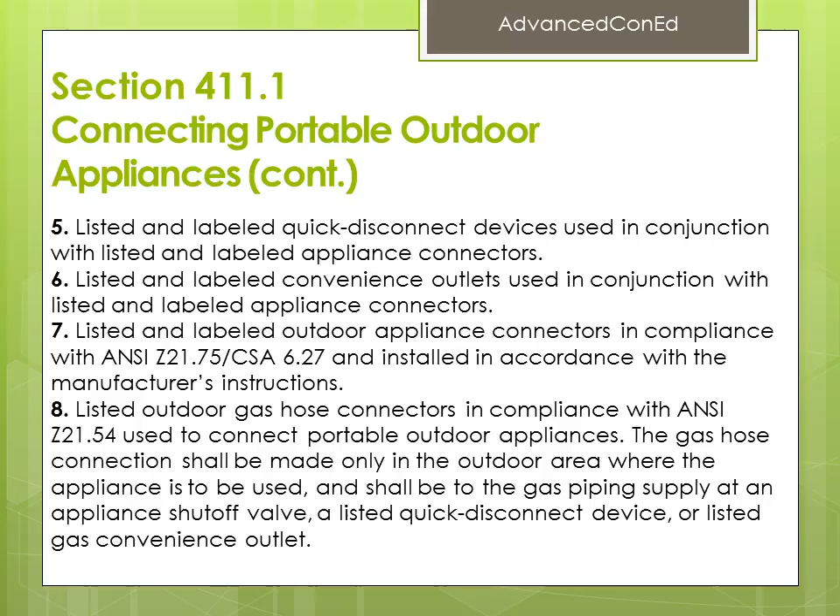Section 411.1 Connecting Portable Outdoor Appliances continued. Discussion: Because portable appliances can be moved, methods 1 through 7 of this section are not suited for connecting portable appliances to the gas distribution piping system.

For outdoor portable appliances, new method 8 is the only apparent option. Outdoor gas hose connectors have to be resistant to mechanical damage, possible heat exposure, and the harmful effects of exposure to weather. Connectors listed to ANSI Z21.54 are evaluated and tested for the particularly harsh environment of outdoor use.

The gas hose connector must be located entirely outdoors and must be connected to the gas piping system at a point outdoors. The point of connection to the gas distribution system piping must be through a listed device that allows the hose to be readily manually disconnected or through an appliance shutoff valve.

The intent of new item 8 is to address portable outdoor appliance connections and to mandate that such connectors be listed to a specific safety standard.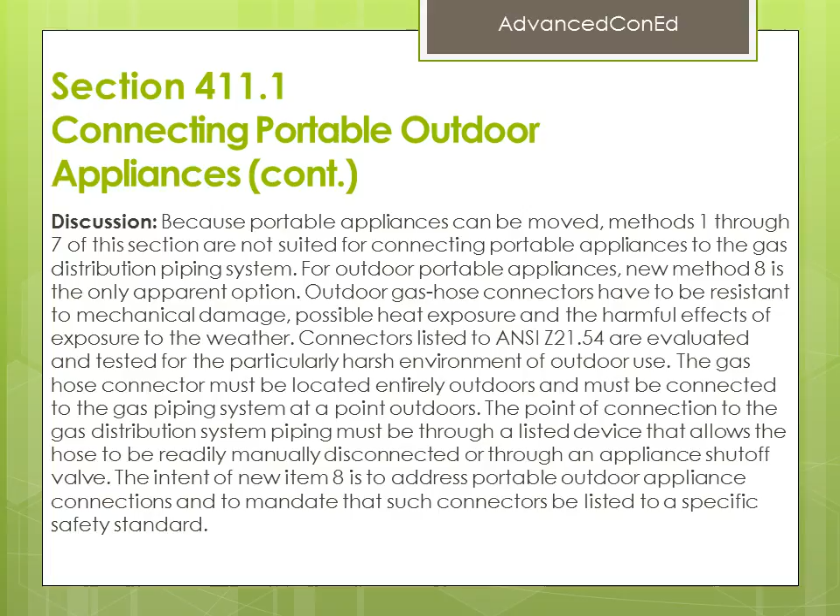Section 411.1 Connecting Portable Outdoor Appliances continued. Please review the following diagrams at your own rate.

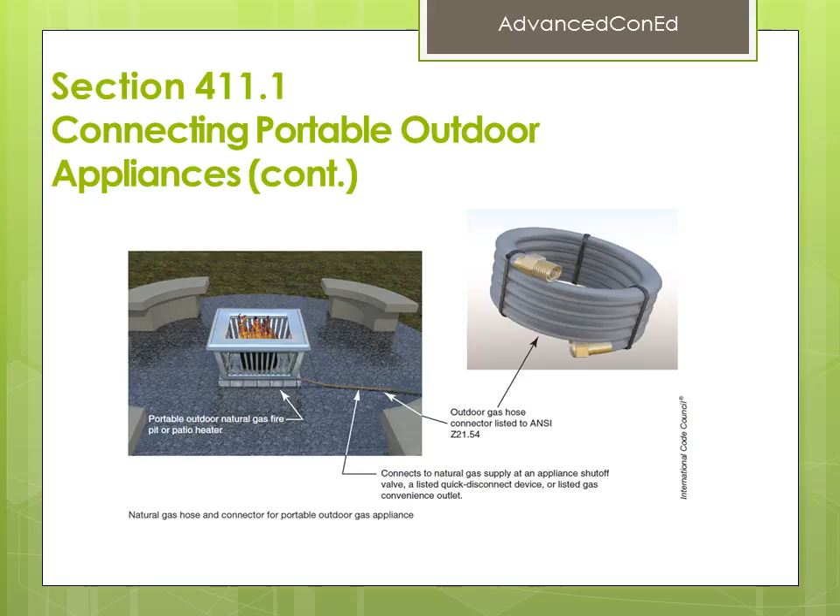Section 411.1.1 Connectors for Commercial Cooking Appliances. Commercial cooking appliances installed on casters and appliances that are moved for cleaning and sanitation purposes shall be connected to the piping system with an appliance connector listed as complying with ANSI Z21.69. The commercial cooking appliance connector installation shall be configured in accordance with the manufacturer's installation instructions.

Movement of appliances with casters shall be limited by a restraining device installed in accordance with the connector and appliance manufacturer's instructions.

Section 411.1.1 Connectors for Commercial Cooking Appliances continued. Discussion: Commercial cooking appliances that are on casters or can be moved periodically must be connected to the gas supply with connectors that are listed to ANSI Z21.69.

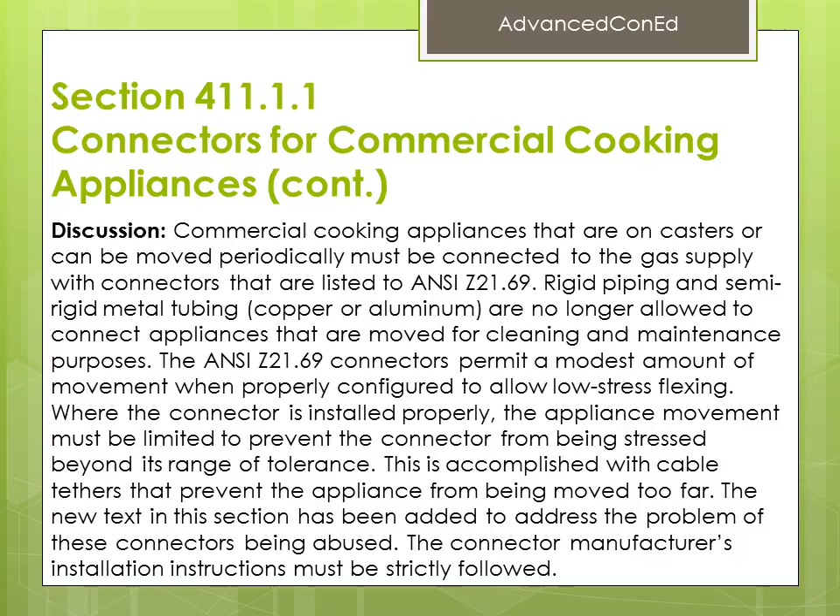Section 411.1.1 Connectors for Commercial Cooking Appliances continued. Please review the following diagram at your own rate.

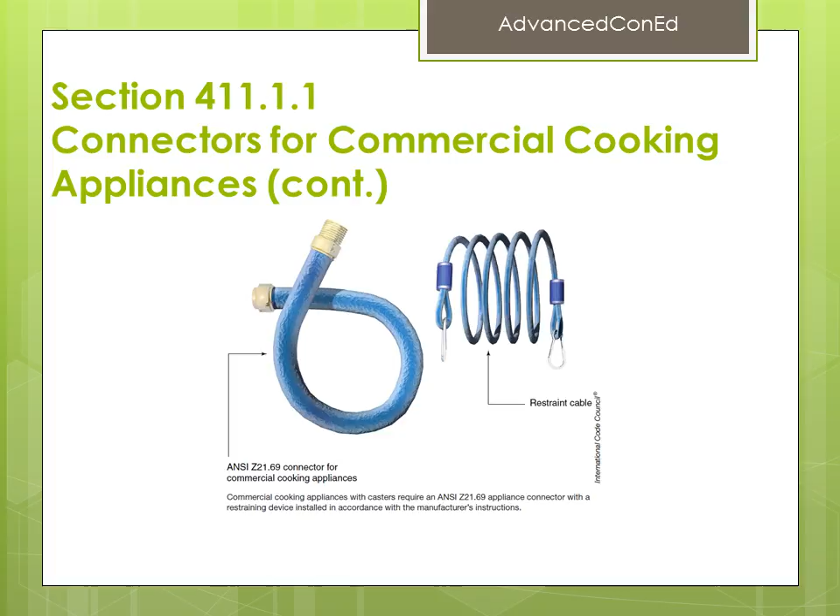Section 502.7.1, Door Clearance to Vent Terminals.

502.7.1 Door Swing. Appliance and equipment vent terminals shall be located such that doors cannot swing within 12 inches horizontally of the vent terminal. Door stops or closers shall not be installed to obtain this clearance.

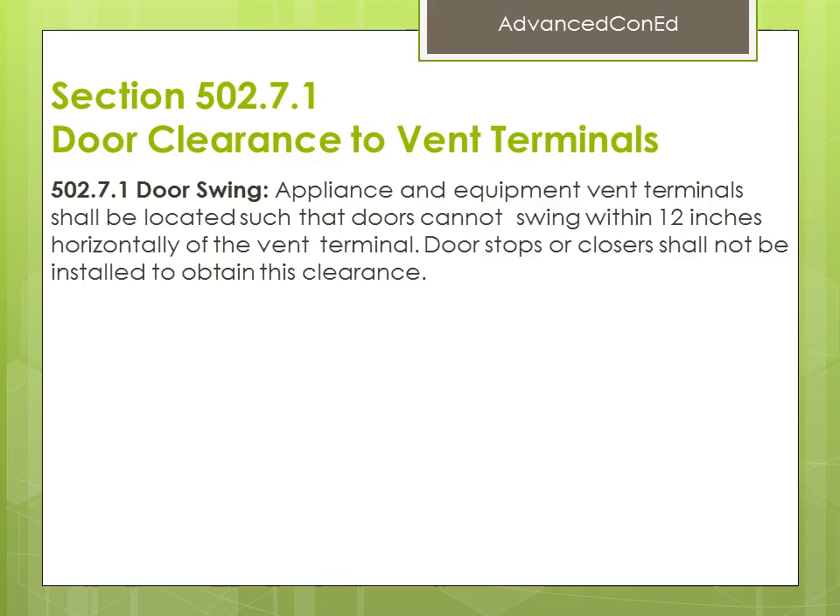Section 502.7.1, Door Clearance to Vent Terminals continued. Discussion. Vent terminals for sidewall vented appliances

such as direct vent gas fireplaces and fireplace heaters, direct vent room heaters, direct vent water heaters, furnaces and boilers, and also non-direct vent appliances, are sometimes located where the swing of a door can impact the vent terminal or swing too close to the terminal.

The result can be damage to the vent terminal, a fire hazard, and interference with the appliance venting and combustion air intake. A damaged vent terminal could cause appliance malfunction and carbon monoxide poisoning.

It could also cause damage to nearby combustible surfaces and create a fire hazard. Door stops and closer devices cannot be depended on because they are easily defeated or removed.

Section 502.7.1, Door clearance to vent terminals continued. Please review the following diagram at your own rate.

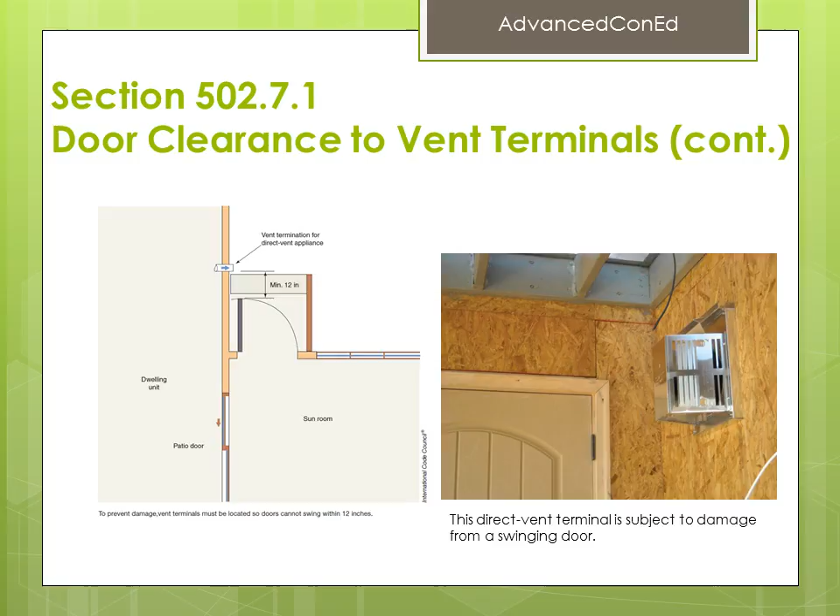Section 503.4.1, Plastic piping for appliance vents.

503.4.1 Plastic piping. Where plastic piping is used to vent an appliance, the appliance shall be listed for use with such venting materials, and the appliance manufacturer's installation instructions shall identify the specific plastic piping material.

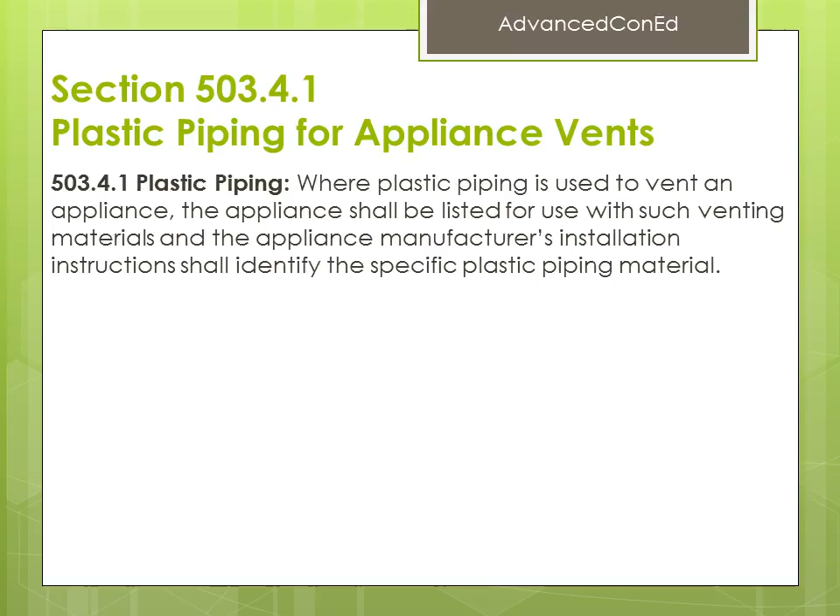Section 503.4.1, Plastic piping for appliance vents continued. Discussion. The appliance manufacturer's installation instructions must clearly specify exactly what plastic materials are required or allowed for venting an appliance.

The appliance manufacturer determines the type of plastic vent that is suitable for venting its product, and the testing and listing agency tests the appliance with that venting system for compliance with the product standards.

The definition of vent does not include plastic pipe such as PVC, ABS, or CPVC because such pipes are not currently listed as factory-built venting systems.

Section 503.4.1 refers to plastic pipe as a material used for venting. It is not referenced as to a vent conforming to the definition.

The PVC, ABS, and CPVC pipe manufacturers do not recommend that their pipe be used for appliance venting because such products are not currently listed for such applications.

There are polypropylene venting systems on the market that are listed to UL 1738 as appliance venting systems, and they would fall under the definition of vent.

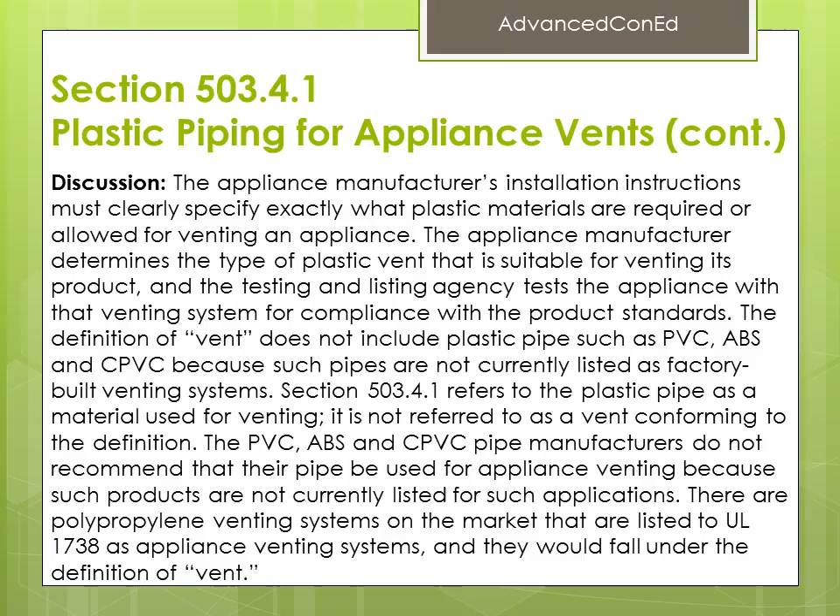Section 503.4.1, Plastic piping for appliance vents continued. Please review the following diagram at your own rate.

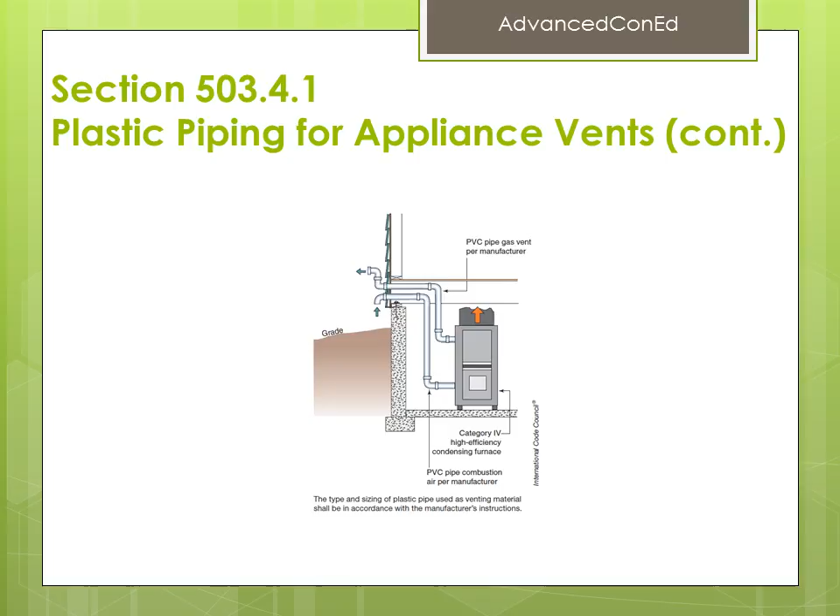Section 503.6.9.3, Sizing of plastic pipe vents.

503.6.9.3 Category 2, 3, and 4 appliances. The sizing of gas vents for Category 2, 3, and 4 appliances shall be in accordance with the appliance manufacturer's instructions.

The sizing of plastic pipe that is specified by the appliance manufacturer as a venting material for Category 2, 3, and 4 appliances shall be in accordance with the manufacturer's instructions.

Section 503.6.9.3, Sizing of plastic pipe vents continued. Discussion. Because plastic pipes such as PVC, ABS, and CPVC plumbing pipes are not listed and labeled as appliance vents,

the code was silent on how to size such pipes. The sizing is covered in the appliance manufacturer's instructions, and the code requires compliance with such instructions.

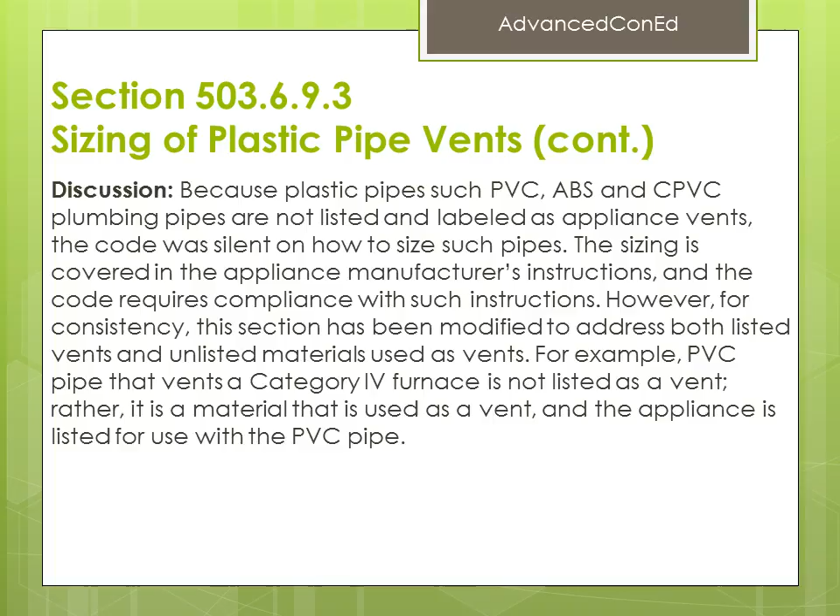Section 503.6.9.3, Sizing of plastic pipe vents continued. Please review the following diagram at your own rate.

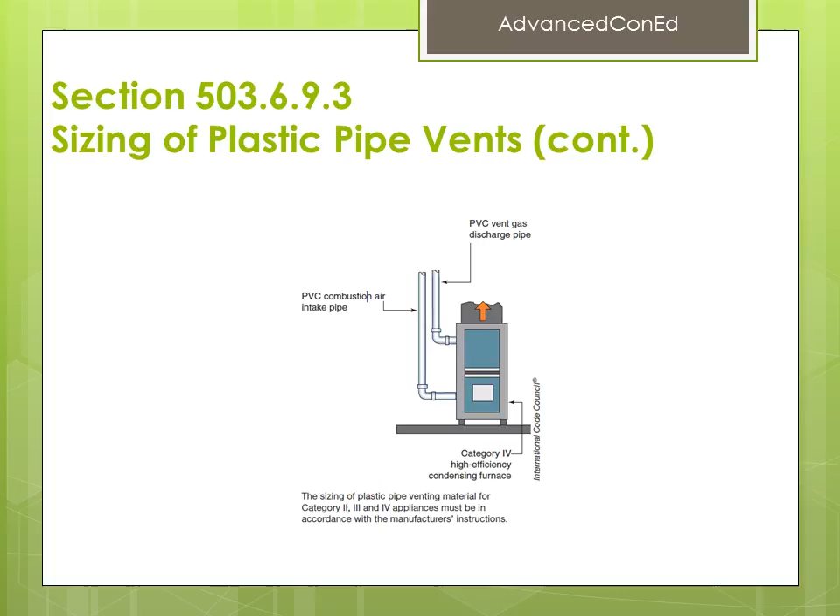Chapter 6, Specific Appliances. IFGC Chapter 6, Specific Appliances, revoked.

IFGC 2015 Appendices. None of the appendices of the IFGC 2015 have been adopted by the OUBCC for inclusion in the statewide minimum code for commercial fuel gas construction in the state of Oklahoma. Appendices A through D are not adopted as the statewide minimum code for commercial fuel gas construction within the state of Oklahoma.

However, other jurisdictions within the state of Oklahoma may adopt any or all of said appendices in accordance with 59 Oklahoma Statute, Section 1000.29.